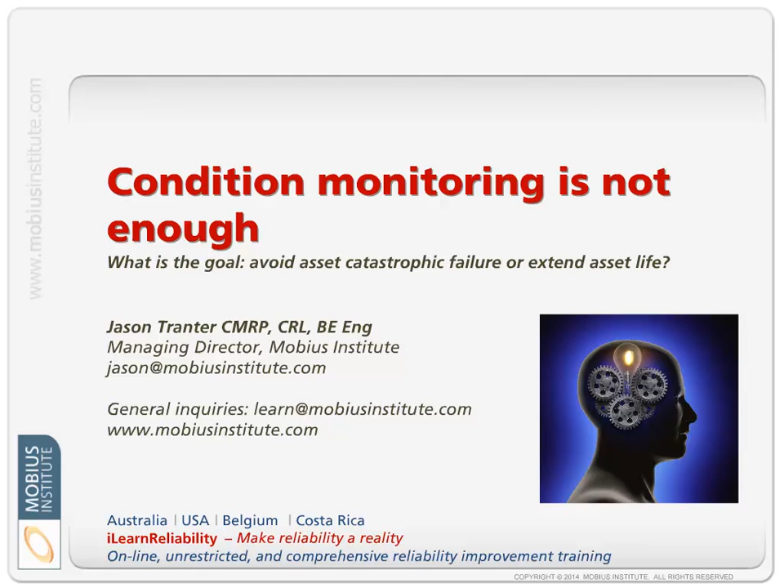In this presentation we're going to talk a little bit about maintenance strategies, reactive maintenance, preventive and predictive maintenance, as well as run to failure, condition-based and interval-based maintenance. Then we're going to talk much more about condition monitoring itself and the benefits of improving reliability, but also about the program and how some programs don't actually take full advantage of condition monitoring. The main emphasis is to talk about how condition monitoring relates to reliability improvement and what we can do with condition monitoring skills to go on and improve reliability.

And then we'll go further, because we'll talk about defect elimination, the design and procurement process and how that affects reliability, the maintenance process, inventory management, maintenance and repair and installation, and also when the machine is being operated, machine and electrical equipment, what can we do to improve reliability through all those stages? So we'll talk about all those aspects, but with an emphasis also on condition monitoring and how those skills can be used to not only monitor the condition, but also improve the condition.

And then we'll get into a little bit about why so many reliability improvement programs fail. We'll talk a bit about what we think you should do in order to make that program a success, but also a little bit about why it fails. And then we'll wrap it up.

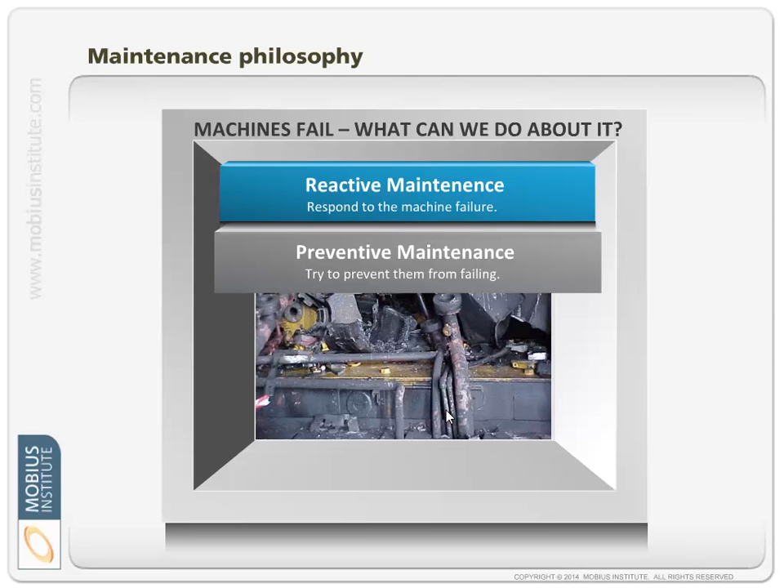Or we can use predictive maintenance, where we'll take certain measurements or perform inspections and try to predict when equipment will fail. If it's in good condition, we leave it alone. But we'll talk much more about these in just a moment. We'll look at precision maintenance much more later in the presentation, but that's certainly a strategy that people look at, doing things like alignment and balancing and just better ways of making installations so that the machine lasts longer. And then defect elimination. Again, we'll talk about that much more later on.

Just on reactive maintenance, really reactive maintenance is no maintenance. We're not maintaining the running status of the equipment. We are just reacting and having to repair or replace equipment when it fails. As I mentioned earlier, a lot of people doing a lot of very good work, working hard to keep equipment running or get equipment back up and running, but there's a lot of safety incidents that follow, a lot of energy wastage.

But really a lot of downtime, a lot of parts failing when they shouldn't. It really costs the company a lot of money, and that loss of money can impact the ability of the company to continue to operate. Shareholders get upset, government departments get upset. Really, it's not the best way.

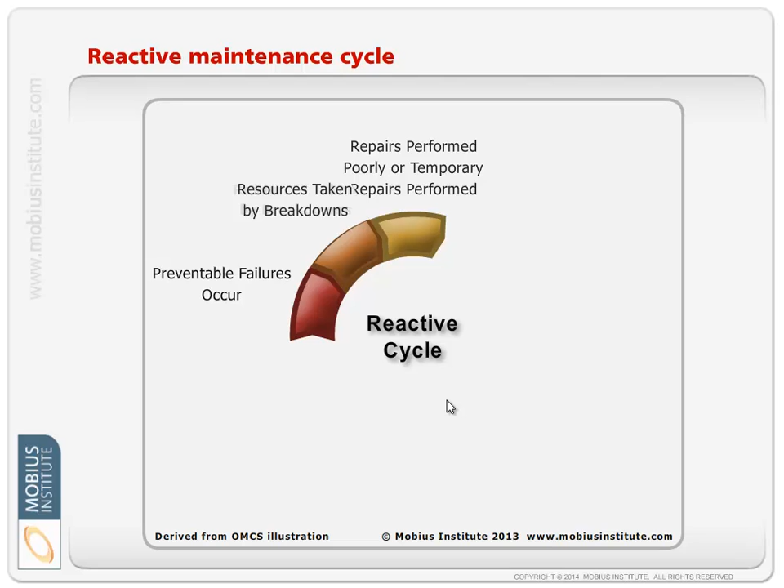When we look at this sort of reactive cycle, we have a problem, resources are taken by those breakdowns. Because everything's so urgent, there's often repairs performed temporarily, just quickly. We've got to get the machine up and running again, so we install the replacement motor, let's say, but we don't necessarily have the time to do it properly.

We don't have time to do root cause failure analysis to eliminate those root causes, but we do get lots of repeat work because we quickly install the machine and it fails soon. We think there's not enough time to do it properly, yet there seems to be time to do it again and again and again. Operators or particularly maintenance people might suggest, wow, if we just made these changes, maybe these failures wouldn't occur. But often everything's so urgent, no one really listens to those suggestions, nothing's improved.

But management start to think, wow, financially this is unacceptable, and they look at ways to cut the budget, to save costs, to reduce costs. And the short-term thing to do is to fire people or change the maintenance practices and make them even worse. Sure, they get some short-term gain, but it's not a long-term strategy.

The situation just gets worse and worse. Morale declines, standards drop further, backlog grows further. Any preventive maintenance tasks that are put in place, if there are any, they're missed because there's always more urgent work. And we continue around the cycle. Preventable failures occur, and so on, and so on, and so on. This is a cycle we need to break out of, and it can seem like it is very difficult to break out of that cycle.

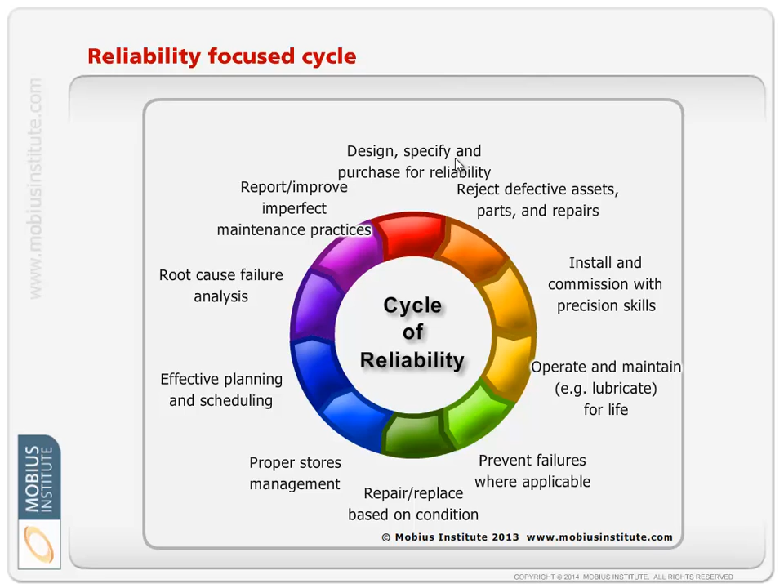If we keep doing that and keep focusing on these things, then we will have a much more profitable plant. Morale will be higher, the shareholders will be happy, the regulatory bodies will be happy, and so on.

The trouble is, if you're trapped in that reactive cycle now, you'll feel like we don't have the time to use those precision techniques, we've got to get the plant running. But as I mentioned before, how come you have time to repeat the job again and again? You install the bearing, you may have to reinstall a replacement bearing very shortly afterwards, or another sort of fault develops. We seem to always make time to deal with those problems. We just don't seem to be able to make time to do it properly in the first place, and that's one of the things that can change.

It's not rocket science, as you'll see. It's really common sense, quite straightforward. You just need to do it, make it a priority.

The other thing is, you might say, well, they're trying to save money. Upper management are trying to save money, and I'm sitting here saying that there may be special tools you need to use to do the job properly. You need training to do it properly, and you may need some systems in place to do it properly. But so often, yes, at times there will be investment that's required, but you'll be surprised at how much you can do without much of an investment, if not no investment at all. It's just a different philosophy, organising the maintenance crew a little differently, making sure operations operate the equipment the way it was designed to operate. There's a lot you can do without much of an investment, if any at all.

So just briefly, it's worth considering, why do we need to improve? What is the business case for all of this? Now, like a lot of things I'm going to talk about in this presentation, there is a lot we could say on this topic - lots of research, lots of case studies. Because it's not the main focus, I'll get to the point a bit more quickly.

As I say, I'm not going to talk too long about all these things. There are other topics we need to get onto, but we are also going to increase availability by achieving the design reliability. Now, there's a certain reliability inherent in any piece of equipment, but we should be looking at what we can do to at least achieve the reliability of the equipment that we receive, but better yet, improve the reliability through cleaning and proper operation, and there's lots of ways to do it. We can improve the reliability and then go further, as we'll discuss later, to get even better results, because what we're bringing into the plant is in better condition and better designed for the application.

And we can increase capacity, so we can look at efficiency improvements by eliminating idling and minor stoppage losses, and improving quality. So we've got a certain availability, a certain amount of time that we're producing a product, but what we want to do is produce saleable products in that time that we're producing.

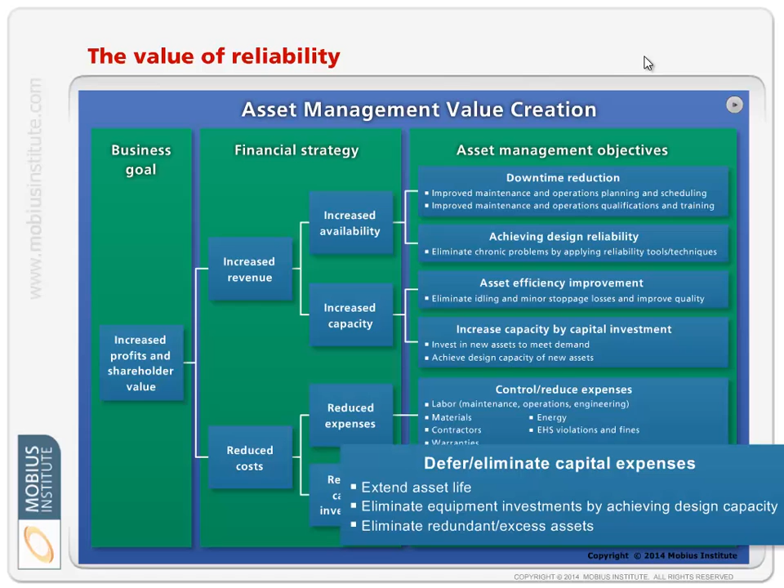So these are really important areas. Jeff Dudley, who developed some of our training product, was the Corporate Reliability and Maintenance Director at Dow Chemical, and he puts it very simply: organizations with poor reliability practices waste 10% of their revenue, waste 15% of their resources, they disappoint customers, they disengage employees, and they constantly deal with new and repeated unplanned events. A lot of what we're talking about flows back into this - why this happens and what we can do about it. He was involved with so many Dow Chemical plants, and that was his conclusion, looking at so many plants, from inside and outside as well.

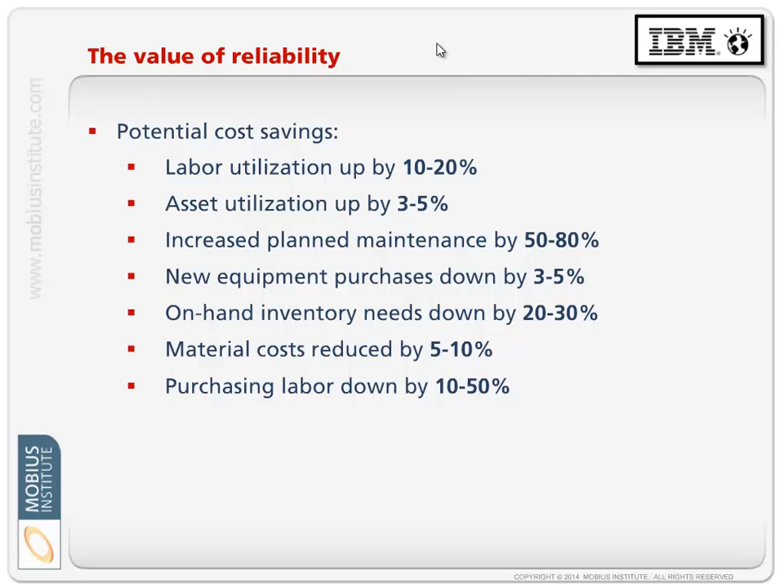Looking at the potential cost savings by going through this sort of process: labor utilization can be up 10 to 20%, asset utilization up 3 to 5%, increased planned maintenance by 50 to 80%, new equipment purchases down, on-hand inventory needs down, material costs reduced, and purchasing labour, contract labour down by 10 to 50%. Again, these are all really impressive numbers - numbers you should aspire to achieve. So we will see how we can achieve those.

Safety and reliability. Everyone, particularly at senior management level, but everyone is interested in reducing the number of safety incidents. The fact is that when a machine fails or when there's an electrical fault, there is a chance of a safety and environmental incident right there because of the failure. It can lead to a safety incident. But the other thing is that any time someone is spending time working on a machine, if you're involved with electrical or mechanical equipment, there is a higher likelihood of a safety incident. It is more dangerous around the machine.

Particularly if you're in a reactive maintenance mode, work is being rushed, potentially unskilled workers are doing that job. You may identify someone who should do the job, but they're working on another project and now they're not available for the job they should be doing perhaps. There's not adequate planning, they're using the wrong tools, etc. The bottom line is there is a direct correlation between safety and reliability. The higher the reliability, the lower the number of safety incidents. In other words, high reliability, high levels of safety.

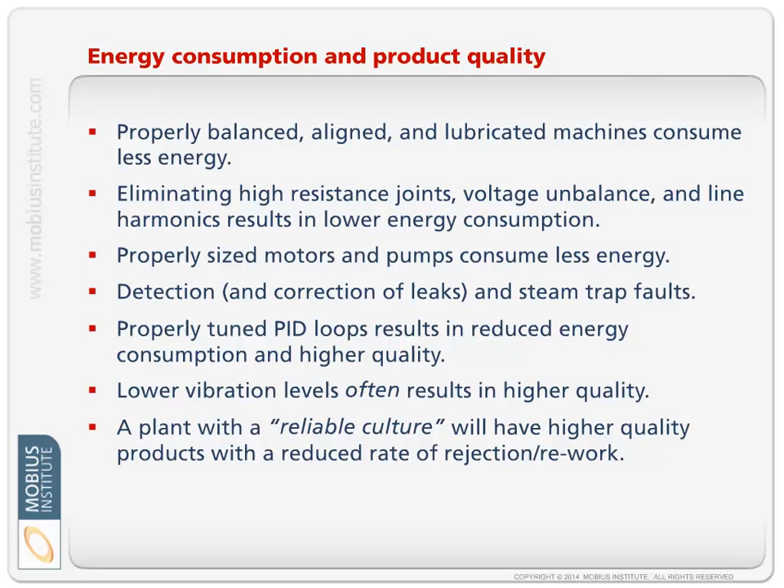Now again, that depends on what it is you're producing, but certainly a plant with a reliable culture will have higher quality products with reduced rate of rejection and rework. So savings in energy, improvements in product quality. Again, it's going to depend on your particular industry.

So let's revisit the question of maintenance practices. We're going to describe them a little bit differently. Instead of just talking about reactive maintenance, which is just the way all maintenance is being done, we're going to choose to have some equipment that we allow to run to failure, and I'll mention more about that in a moment. We are going to identify some equipment where we are going to perform interval-based maintenance.

It's going to make sense because they are age-related faults to schedule the maintenance, some replacement task on a time basis or a number of running hours or kilometres travelled or whatever it happens to be. But for a lot of our equipment, which generally speaking may be 80% of equipment, but that's going to depend on your industry, we will implement condition-based maintenance.

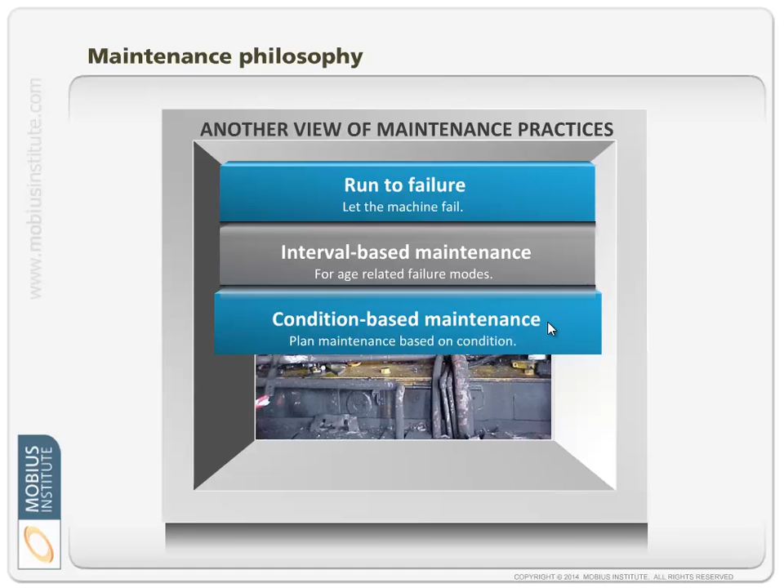So some we allow to fail, some we provide maintenance on an interval basis, but the rest we have condition-based maintenance. And we will identify some equipment that doesn't conveniently fall into any of those categories, and we will look at a redesign. And then, as a general statement, we'll have proactive maintenance. But it's much more than proactive maintenance. I'll be talking more about it, defect elimination.

So before we can really talk about that too much, we need to understand a little bit more about failure modes and failure rates. So if we look at a family of equipment, motors and pumps and so on, how does that equipment fail and why does it fail? In many cases, when someone's trying to break out of reactive maintenance, their thought is, well, I need to get ahead of the curve. If we can plan the maintenance before it fails, then that's ideal.

And that is ideal, to plan the maintenance before the equipment fails. Where that goes wrong is there is an assumption that you can accurately predict, just simply based on running hours, let's say, when the equipment's going to fail. And unfortunately, that's not necessarily true for the majority of your equipment. And I won't dwell on this topic because we do have other presentations on this.

But the general feeling is, if we look at the y-axis here being risk of failure, there's always some risk of failure, but after it's been overhauled or repaired or replaced, that risk will be low. We'll go through some period of time, and then finally, if we look at just an individual piece of equipment, something happens such that the bearing's damaged and or wear begins, and the risk of failure increases and increases until finally it does fail.

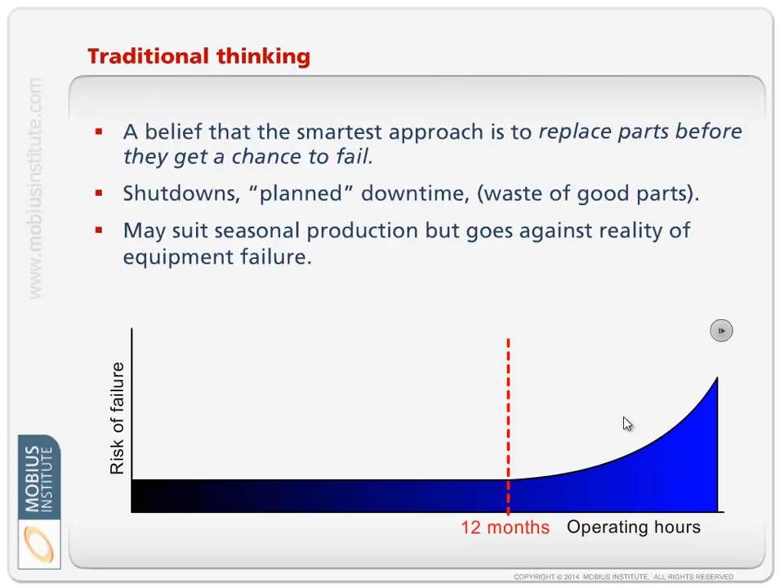And we can look at a whole family of motors driving pumps and say, yes, that is what we expect. And based on that, we might say, well, if we replace all the bearings and seals or whatever you decide is appropriate at 12 months, then we have this trouble-free operation. We perform that maintenance task, and then we reset the clock, and we just keep in this mode. And that would be lovely if it were true, and lovely if the equipment was going to fail soon after, and that's what we've avoided. But that, unfortunately, is not the case.

First, we have to consider that there's infant mortality. Generally speaking, depending on your maintenance practices, the worst thing you can do is touch the equipment. Once you open it up and go to replace a bearing, even if that equipment was in perfect condition beforehand, there's a chance, unfortunately quite a good chance, particularly in a reactive environment, of introducing some sort of problem.

The bearing's not installed properly for one of a variety of reasons. Lots of things can go wrong. So in actual fact, when we go to start that machine, there is a much higher risk of failure. And it can take some time before we can really say, all right, the risk of failure has reduced, we've survived that infant mortality period.

And now we're just operating the machine through this period of relatively low risk of failure before it naturally begins to fail, because we're assuming they're age-related faults. But because there are so many reasons why equipment fails, again, if we just look at our motor pump, there are so many reasons why the bearing might fail that we really don't know when the failure is going to occur. We call that random failures.

It could occur after 6 weeks, 6 months, 6 years. It could be anything, because we don't really know how bad the alignment job was, how badly the bearing was installed, how much misalignment, how much unbalance, how bad the lubricant is. We don't know. So looking at any one piece of equipment, it could wear out after this much time. This is just one piece of equipment. It could wear out after that time. When I say wear out, fail. That much time, we just don't really know.

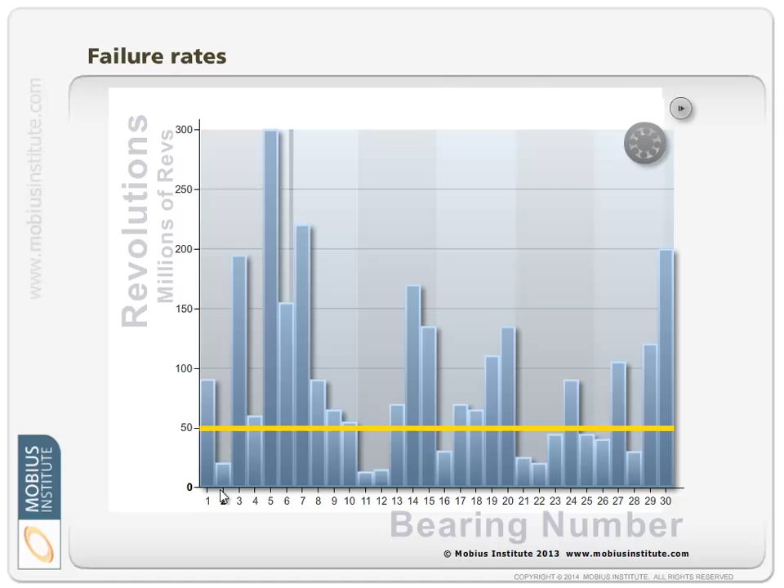Now you can see that some bearings failed rather quickly. Some lasted a very long time. Now it's not to say that your results are going to be as dramatic as these, but the bottom line is that it isn't a consistent, predictable age that you're going to achieve. So you certainly don't want to be maintaining or replacing these bearings to avoid any failures, because these bearings lasted a lot longer and you're wasting money.

I almost said the word react, because condition monitoring is a little bit like an advanced form of reactive maintenance. We're determining that there's a problem and reacting to it. But at least we don't allow the failure. We can plan the maintenance for the most convenient time with the lowest costs. But if we can improve the maintenance practices through the techniques that I will talk about, we can increase the life of these bearings as well.

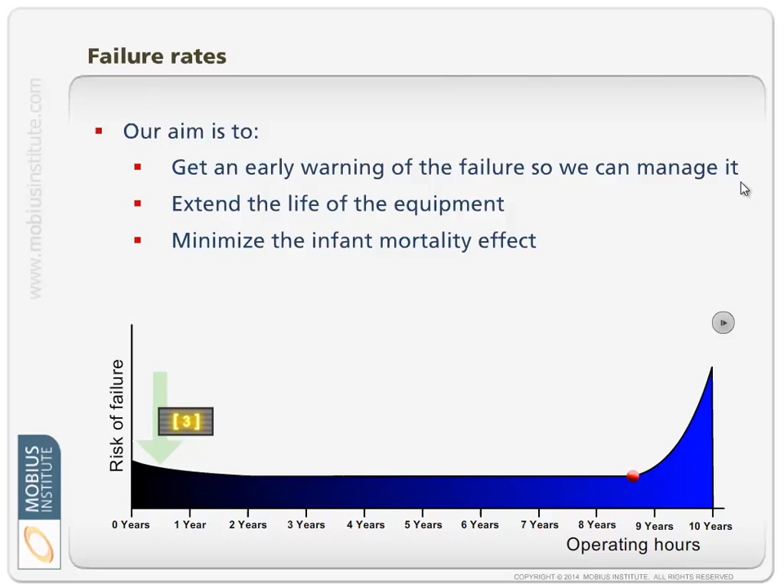What we also want to do is extend the life of the equipment. Yep, detect the problem earlier, but make the detection of the problem 9 years, not 9 months or 9 weeks. And finally, we're going to change our maintenance practices to greatly reduce that risk of infant mortality. So that's something else we want to do. And again, all these defect elimination techniques that I'll talk about achieve that goal as well.

So I mentioned that run to failure is still acceptable, but only under certain situations. The equipment is not expensive to replace. It doesn't pose a safety risk. They're not critical, and of course we'll perform an asset criticality ranking in order to determine what's critical. That failure doesn't cause secondary damage, and you carry spares, or you can get them easily enough such that when there's a failure, it doesn't really matter.

And therefore you can't justify either performing condition monitoring or preventing failure by replacing parts on some sort of interval. And it probably isn't justified to perform root cause failure analysis unless you find it easy to do and you know why it's happening and you can make some sort of an improvement. But ultimately, equipment like that you can run to failure, and that's a sensible thing to do because you'd be wasting money to do anything else.

You still might make sure that you install it properly, and if it requires lubrication, do that properly. Consider what spares are required and how important it is to have these sorts of spares. And if you hear that the fan's making some awful sound, you might still repair it before it catastrophically fails, or replace it. That's up to you.

But then we can look at interval-based maintenance. Now, here is the situation where we are confident that if we perform a maintenance activity based on the operating hours or the kilometres the trucks have gone, or just based on calendar, that is the most appropriate strategy. And I'm sort of talking about it in this order, in other words, not talking about condition-based maintenance now, because I'm going to talk much more about condition-based maintenance. But the bottom line is we should really try and do condition-based maintenance, and if that's not possible, use this technique.

So basically, if they are age-related and we cannot detect them with some sort of condition monitoring technique, then we should try and prevent them. If we know that it takes a certain time for this particular cog to fail, then we'll just schedule its replacement in time. But when we talk about preventive maintenance, I've sort of deliberately not used that term because it can be used in very different ways. So that's why I'm talking about interval-based maintenance.

The act of performing either a classical condition monitoring task like vibration analysis on some time schedule, or performing an inspection, I'm going to lump all of those tasks together as condition monitoring or condition-based maintenance. So going out there and looking at the cogs and looking at the teeth, I consider that condition monitoring. It's you performing an inspection, and your maintenance decision to repair it, to replace it, whatever's applicable, is based on its condition, not based on a time interval.

So you have to think really what tasks, what assets do you have that really do fail based on a time interval. In this case, talk about tyre wear. We can say that that's an age-related fault, but different drivers might achieve different rates of wear. Better drivers might have the tyres wear less, depending on road conditions, weather conditions, all sorts of things. And therefore, again, we can inspect the tyres. We may plan to, have in the budget to replace those tyres on a certain interval, but ultimately we can perform an inspection, and if the tyre's still good, we don't replace it.

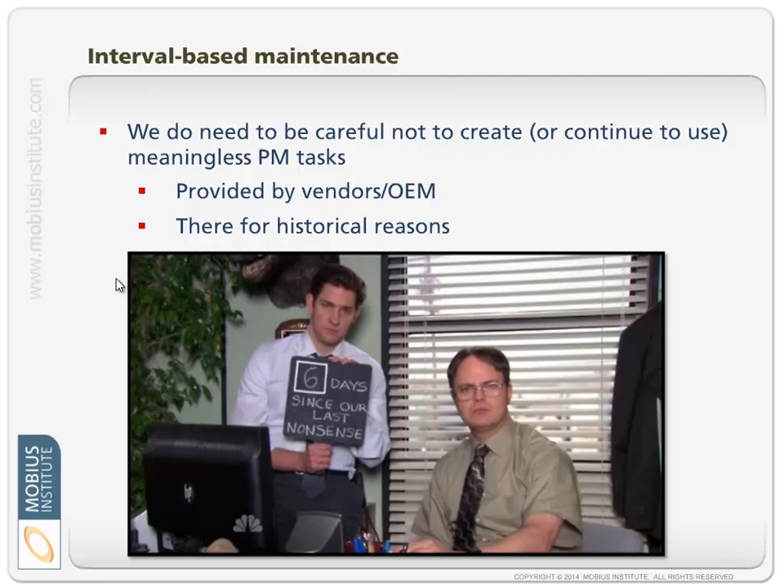And of course, tasks should be more useful than just saying 'check pump.' What is a person checking? Just for a laugh, the pump's missing. Oh, they actually did detect something this time. But you've got to make sure that PM tasks, planned maintenance tasks, are actually useful and adding value, and have a way of reporting back that some sort of work is required.

Because any time we perform an intrusive task, we have the likelihood of damaging the equipment. Having a joke, you drop a flashlight or a torch inside and it damages the teeth, but it's true. You open a machine, you increase the likelihood that you're going to damage it and therefore reduce its reliability.

So let's look at condition-based maintenance. We know from a lot of experience that equipment warns you before problems occur. The ultrasound tells you there's a leak. Ultrasound and infrared tells you there's arcing. Ultrasound might tell us that there's a need for grease.

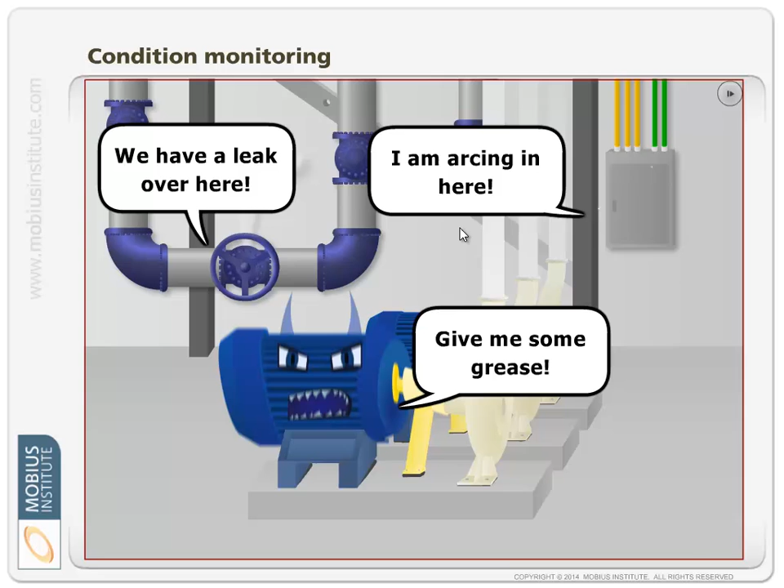Vibration might tell you. There's lots of different condition monitoring technologies that tell us what the condition is, and we can act on that. So we have the more classical techniques: vibration analysis, ultrasound, thermography, oil analysis and wear particle analysis, motor testing, dissolved gas analysis on transformers, partial discharge, and lots of other classical techniques that may require some special instrumentation and some expertise.

But we can also perform inspections and make observations. Operators can be asked to not only keep an eye out for problems, but specifically go and look for oil leaks and bearings that feel hot, and so on.

And then we can also use performance monitoring to look at the performance characteristics of a compressor or a pump, looking at flows and pressure, and see, okay, it seems to be okay from a vibration point of view, but in actual fact it's not performing the task correctly, it's not efficient, and it may have functionally failed. It was there to achieve a certain pressure and flow, and it's not doing that.

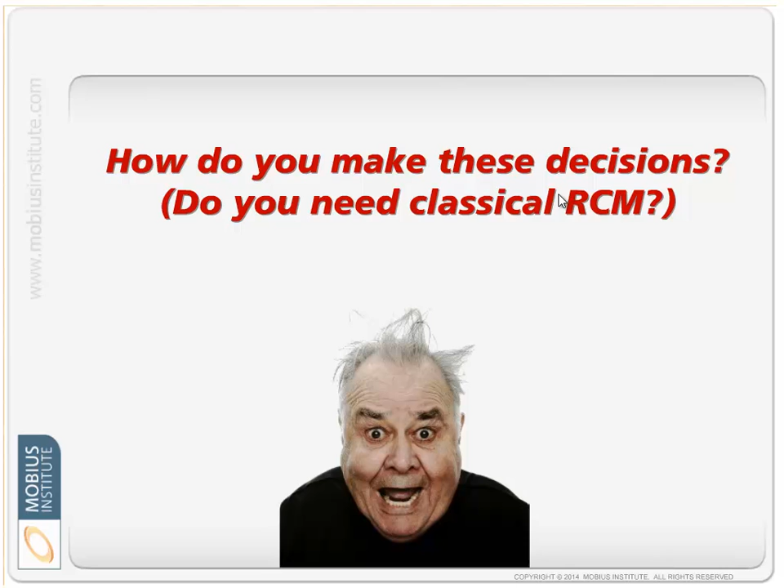We could talk about classical RCM for a long time. I've used this guy with that expression simply because, on the one hand, a lot of people have tried and failed, and I'll mention that a bit later, but also a lot of management are a little bit wary of RCM. Now, I don't want to say it's a controversial topic, but some people have very strong views one way or the other. The truth is that taking a classical RCM approach can suck up a lot of time and resources, and sometimes there is no result as a result. There is a more streamlined way to come to these conclusions without going through this really detailed process.

There's a lot more we could say about that, but that's enough for now. What I'm just going to briefly mention is that ultimately we're trying to develop this reliability strategy. Which ones can we allow to fail, and then we'll have run to failure? Which ones can we predict, and we'll use condition-based maintenance? Which ones can we prevent through some age-related interval task, and we'll use interval-based maintenance? And if we can't prevent it, we can't predict it, but we don't want to let it fail, then we need to consider a redesign.

But how do we make those decisions? Well, at the very least, you need a master asset list. You need to perform an asset criticality ranking so that you can prioritize all these sorts of decisions. You then need to think about the failure modes, the risks, the detectability. You can go through a practical process of making these decisions.

In the interests of time, I won't elaborate too much on it, but rather than just saying I'm going to buy a vibration analyzer and start measuring things, you'll get a return on investment. It might be a satisfactory return on investment, but you will achieve much better results if you go through this process.

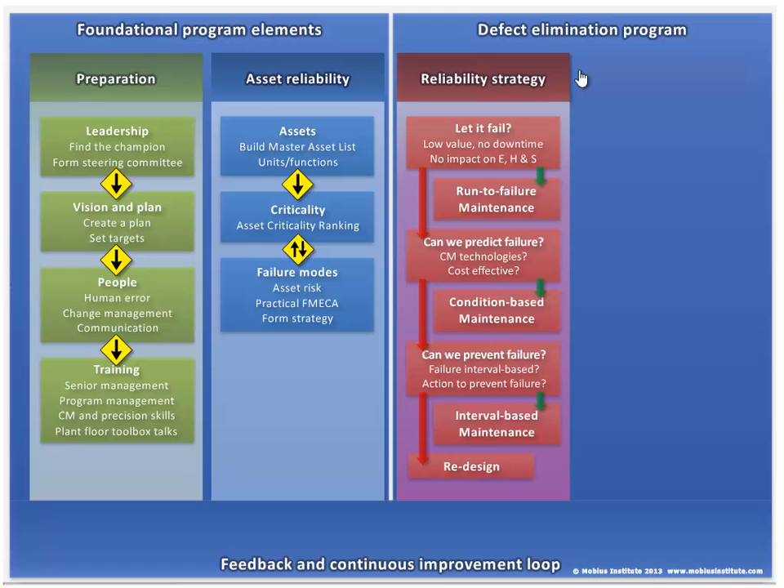There's a lot more to this. I won't go into all the details right now, but certainly having leadership and having this driven from the top is a good idea. Having a plan and a vision to make all this happen, considering all the culture change issues and so on, is an important thing, and training. As I say, I'm not going to dwell on this. The ultimate goal is to get to this point where we can have proper procurement, stores, inventory management, planning and scheduling, precision skills, operator care, and root cause failure analysis. And then we want to look at a proper continuous improvement program.

Okay, just to dwell a little bit on asset criticality ranking. A lot of organizations really struggle with this because there's this argument about which is most critical, on a very simple measure: how would I feel if it failed? Well, we don't want it to fail because it can stop production, and there might be thoughts about the safety implications or the cost of repair or replacement.

Just looking at the importance of a piece of equipment makes it very hard to decide which one's more important than another, because there's a lot of equipment that we can easily say is very important because it can stop the plant. We need to go further. We need to break that decision up into its component parts. We need to get agreement.

What we need to understand is that criticality is not just importance. It's not just about the consequences, it's about the likelihood of failure as well. So if we can assess that two pieces of equipment are equally important to us, the consequences are the same, but one has much better reliability than another—in other words, the likelihood of failure is much lower with one than the other—then the one that is more likely to fail becomes more critical.

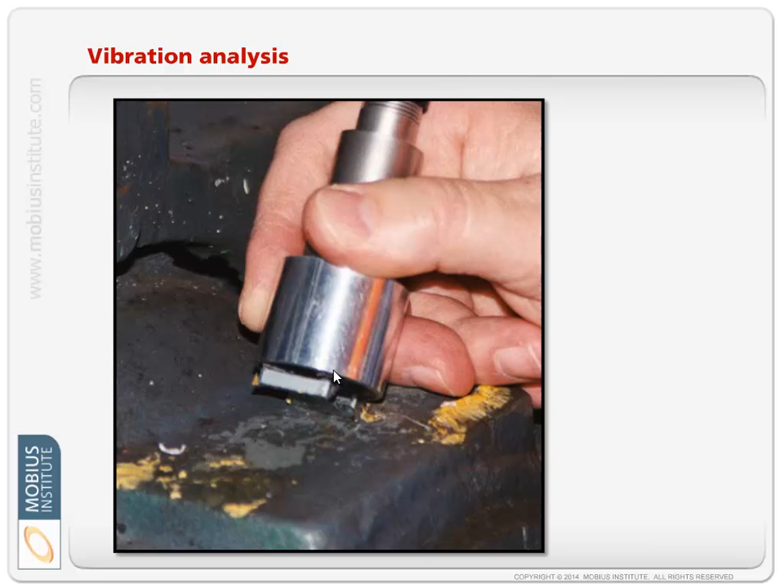This one, a person's taking vibration readings, but the thing's covered in some sort of dust—maybe it's a cement mill or something else. Now, yep, you've got to take the measurements, but why not be proactive and say, well, having a machine covered like that will reduce its reliability, so let's keep it clean. Don't just monitor and wait for the bearings to finally fail or something else.

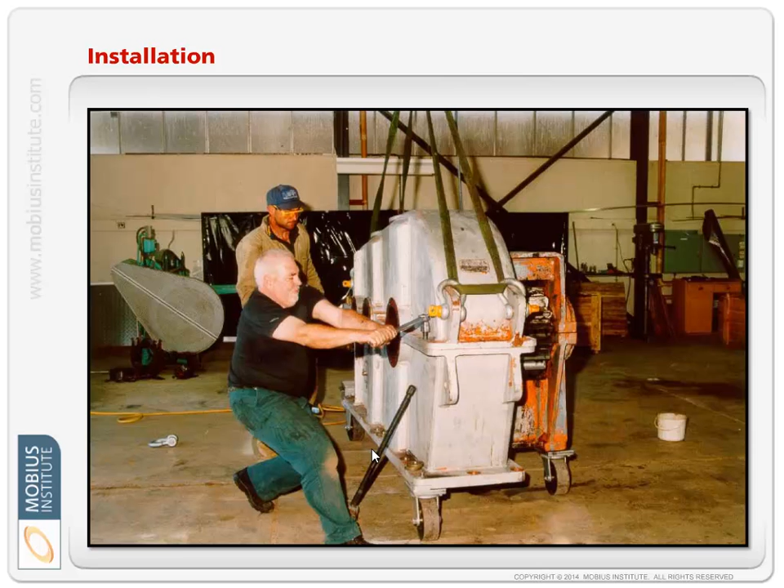Bearing installation—just for fun, there he is with a hammer, giving a good old bang. It's not the best way to do the job. It's just not the best way to do the job. An appreciation often doesn't exist about the need for the right tool and how to use those tools.

And then even if you're doing condition monitoring properly, the question is: is anyone listening? Are the maintenance planners actually listening to you when you say there's a problem? Do they believe in the technology? Is the philosophy that we will plan properly when the condition warrants it, and not based on calendar?

Just as a little detail, there are a lot of ISO standards out there that talk all about how people involved with condition monitoring should be trained, what experience they should have, and the whole certification process. Again, I am biased—we offer certification and we're accredited to these standards and so on—but they are there for a reason.

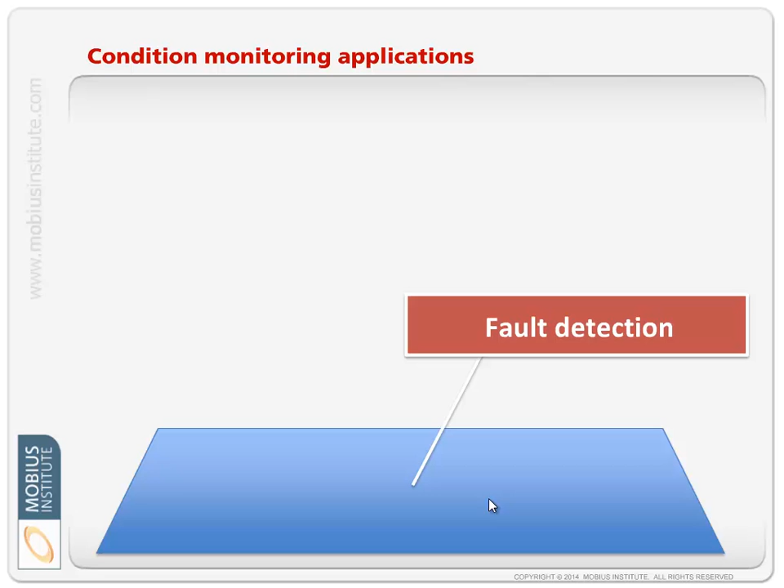I like to describe condition monitoring as a number of layers, and I would argue that most people really just deal with it at this primary layer. It's just fault detection. We are looking for problems, we find the problems, we deal with the problems.

If we have a proper condition-based maintenance program, then we can go a step further and say, well, we're not just reacting to problems, we really are properly performing our maintenance based on conditions. That's a good thing, and this is where we start bordering on reliability improvement.

But it's also using condition monitoring for quality control. So when a piece of equipment is repaired, we can test that piece of equipment. I'll talk much more about how condition monitoring can be used for quality control as I go further.

As I mentioned earlier, we can get an early warning, we can reduce the maintenance costs, we can enhance the planning process. It is valuable just looking at it from a QA point of view and a maintenance planning point of view.

...to try and gather a lot of data to understand the true reliability of their plant, considering redundancy, equipment in series, equipment in parallel, and all that sort of thing, to try and understand what their likelihood is of being able to achieve a certain level of utilization.

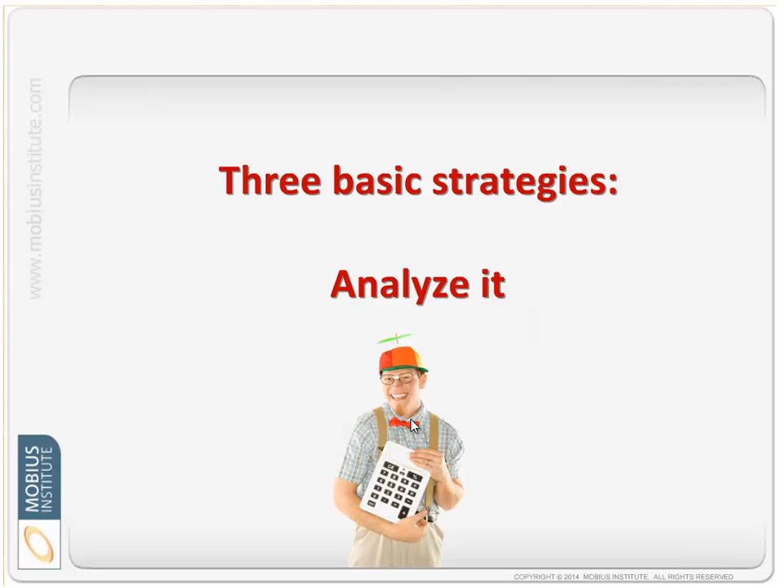We can also look at it from a maintenance point of view. Something breaks, we fix it. We perform some tasks like lubrication and so on to maintain its operation. And I would argue that to a large extent, reliability-centered maintenance focuses on this. It suggests that maintenance is responsible for the reliability problems - that if we improved our maintenance, we would achieve better reliability, and if we've got better maintenance, we're better able to deal with poor reliability.

Now, it's not to say we don't want better maintenance practices or a maintenance crew able to deal with problems, but I think the focus has got to be on improving reliability. Don't just accept the inherent reliability you've experienced thus far - that doesn't have to be your future. It does not have to be your future. So I'm going to add another layer where we look at condition monitoring and see how we can use it to proactively improve reliability, and one of the best techniques is defect elimination.

Let's explore defect elimination in more detail. Unfortunately, I can't go into every single detail in a lot of depth - this is just supposed to be a couple-hour presentation, but let's have a look at it. We're going to look at how we can improve reliability and utilize our condition monitoring skills to contribute to that improved reliability.

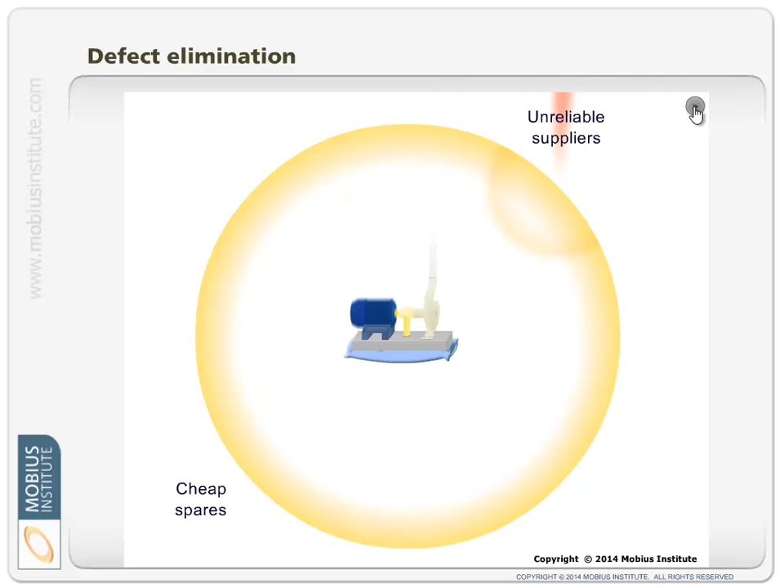Cheap spares don't get into our plant, because we know they're cheap up front, but life cycle costs are terrible. Transportation - you've got something that's in perfectly good condition, hopefully, it's transported to your plant and it's damaged. False brinelling of the bearings, very common.

Unskilled contractors - maybe we're too willing to just accept that during shutdowns we're going to let all these contractors come in, do the work as quickly as they can, get out, and not be held accountable. You've got to stop that if you want to improve reliability. Designs of equipment - who is making a design with life cycle costs in mind, maintainability and reliability?

Once we've done that, we are stopping, and the procurement process is part of that, and I will elaborate on all these things. Now hopefully what gets into our plant is worthy of your plant. You haven't bought anything, you haven't contracted anything that's unreliable. What gets in your plant is good.

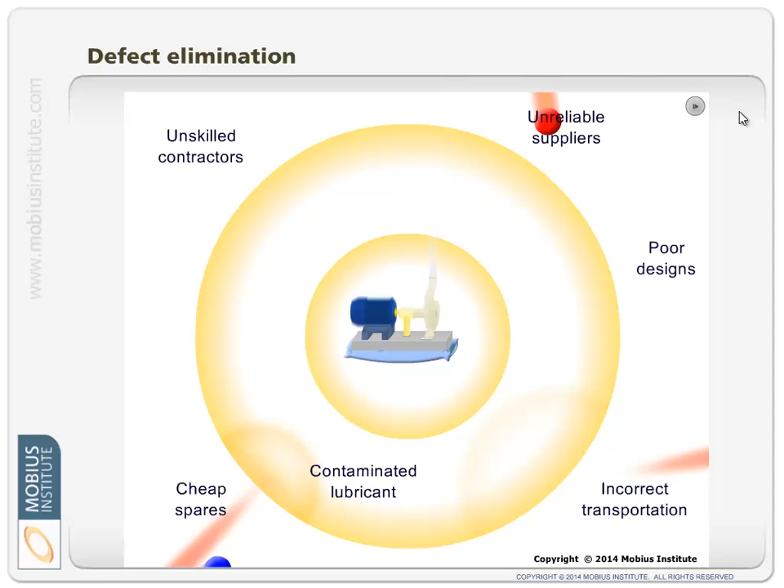Now, how do we protect the machine further? Because what we need to do is we've got to keep contaminated lubricant out of that machine. We can buy good lubricant. We can also buy poor lubricant, but we can buy good lubricant that becomes contaminated, and we don't put that in the machine. We don't damage parts while they're sitting on the shelf and then try to put them in the machine, or we don't damage them in the process of putting them in the machine.

And as part of that, we don't accept poor installation practices. We've got to protect our machine from that. We've got to protect our machine from poor operating practices and unnecessary PMs that just induce problems, and intrusive inspections that induce problems. And finally, we're going to do true maintenance, you might say, by cleaning it, adjusting it, replenishing various lubricants and so on, and we will monitor it.

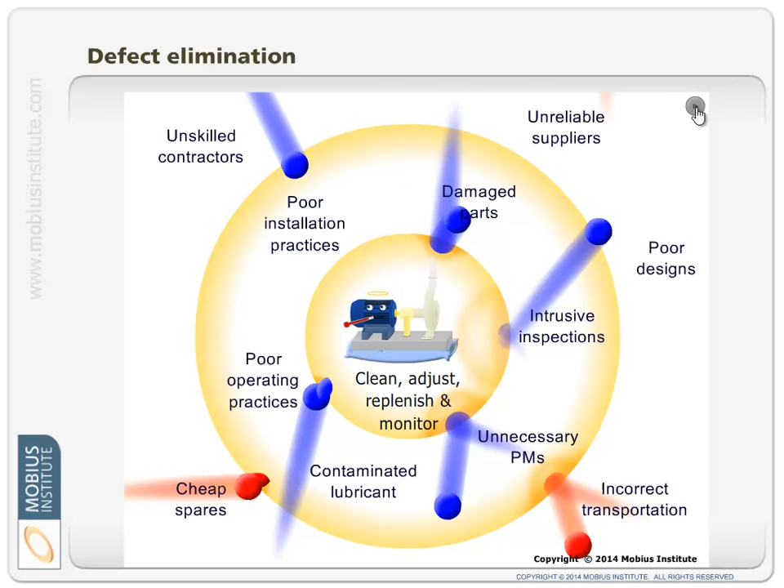We will watch over it and say, we've protected you as much as we can, but wear still happens, and problems still happen. And when that happens, we are going to monitor it, deal with it, use root cause failure analysis to see how it got through and harmed our machine. So that's the basic idea of defect elimination. So let's talk about it a bit more.

I'm going to basically break it up into three areas. When it's operating, when we are installing the equipment or overhauling it and storing the equipment, and the procurement and design process. So we have to look at our procurement process and the design decisions we are making so that the life cycle costs are prioritized over the upfront purchase costs. And we have to put a barrier, as I just showed, around the plant.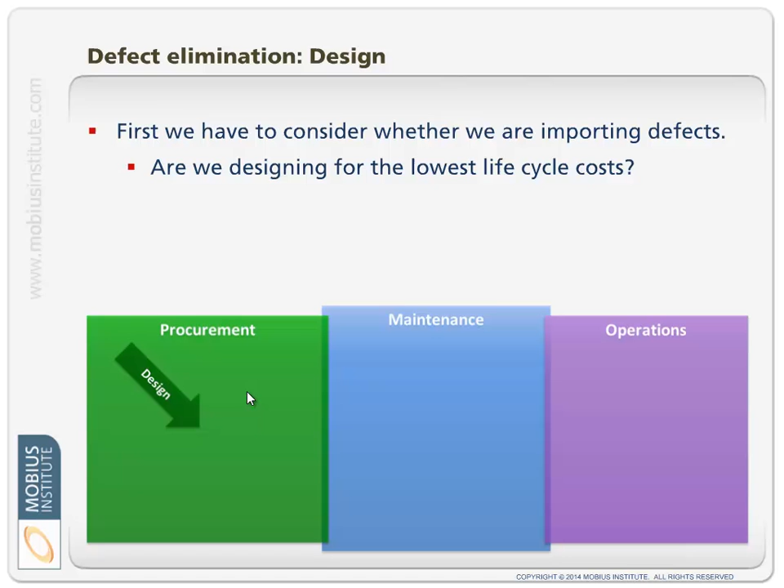So, number one, how are you going through the design process at the moment? Are you designing for reliability and maintainability? Often the answer is no. And then we can look at energy efficiency, but we have to look at how, for example, a motor is rated. So often motors end up being put in place that are rated well above what they need to be. That is not good for the motor. A motor is designed for a particular task, and therefore the correct motor should be specified and purchased and installed. It is very important. As I say, motors are designed a certain way, and that's how they should be operated.

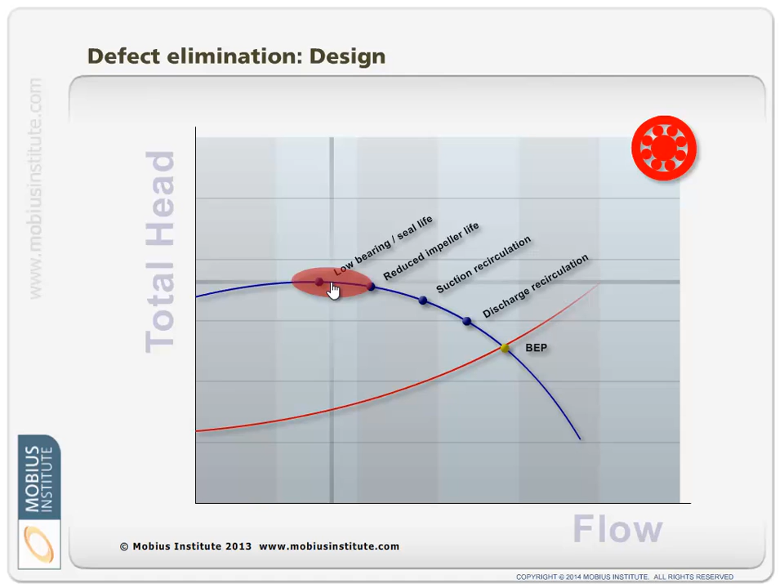Same is true for the pump. We're expecting a certain flow and pressure, and that's how the pump should be specified. We shouldn't over-specify it, and therefore the pump isn't operating at its best efficiency point. All these topics we could talk about in more detail, but we don't have time. If we operate it with lower flow than we should, then we damage bearings and seals, we affect the impeller, we have cavitation and temperature rises.

If we have too high a flow, then again we affect the bearings and seal, and we have high flow cavitation. We need to operate really close to the best efficiency point. Later on I'll mention this again because that depends on how we actually operate it, but at least we need to purchase it so that we can operate it at its best efficiency point.

The purchase process is also so important. Again, I talk about the life cycle costs, but what is the goal of the purchasing department? Usually, it's to buy equipment at the lowest possible price. And that is an important goal. You don't want to spend more money than you need to, but what we have to do is set the bar higher. We need to have the least expensive product that meets a much higher standard. So we have to put those standards in place.

And you have to be very careful about what you're buying. Counterfeit bearings, I'll mention a bit more about that in a moment, but lubricants that don't meet spec, flimsy pumps and fans, and inefficient motors, and equipment with poor reliability and maintainability. If you're not already familiar with it, counterfeit bearings are a real problem. Counterfeit bearings can look better than the real thing. If you just did a normal inspection, they can look better than the real thing, but they are not better than the real thing, not by a long shot.

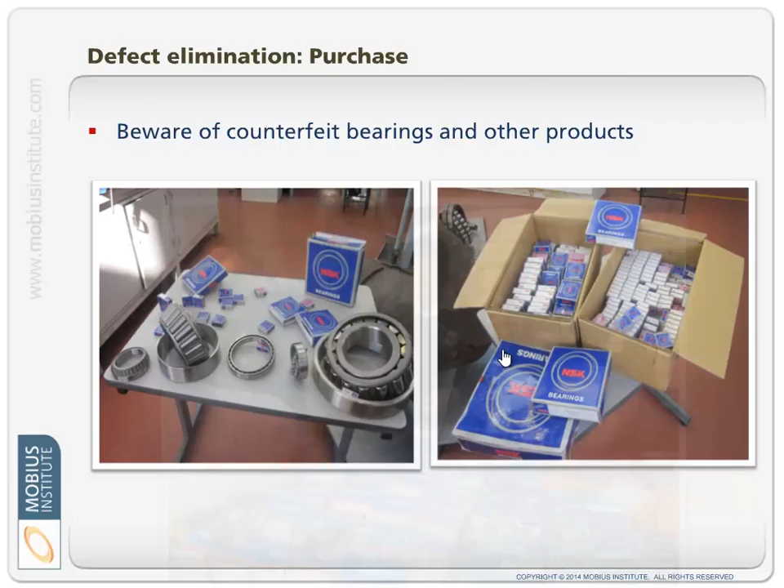And you may have them in your plant right now. When you have failures, you may wonder why you're having those premature failures, but counterfeit bearings could be part of the reason. You need to be aware of just how big a problem this is right now, and not just bearings, oil filters, lots of things.

You just got to think, where is it coming from? How's it been designed, engineered, manufactured, and all that sort of thing, through that procurement process. The equipment, you may think it's fine, but how's it been stored and treated?

All very, very important. This also goes for the people outside your plant who do work for you, like motor rewinds and balancing and so on. What specifications are you putting in place to make sure that they're doing the best possible job for you? Is it the lowest cost bidder? When you send a rotor out to be balanced, what specifications are you putting on that? Are they just balancing it and giving it back, and the vibration's lower, but is it as low as it could be? Are you using ISO standards to set this?

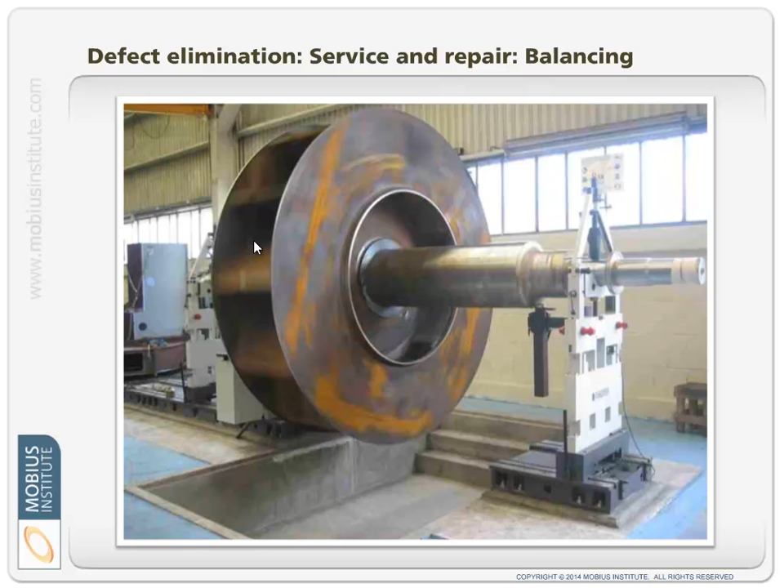And it goes for rewinds and all the rest. You need to know what it is these suppliers are doing, and you need to tell them, well, this is the standard I expect. Otherwise, you will end up with problems, and they will be your problems. Okay, some things might be under warranty, but a lot of times, if it doesn't happen right away, you're left holding the can. So it's very important to put these standards in place.

It's really serious, and the people transporting the equipment need to understand that. And if you don't feel it's been transported properly, then you need to be affirmative about it and just say, well, we're not accepting it. You've damaged it.

Now, this is where the condition monitoring stuff comes into it. It's okay to say we are going to set a high design and procurement standard. We're going to hold our service people to a higher standard and all that sort of thing. But unless you're checking it, unless you're asking them to prove it to your satisfaction, well, they may not provide you what you think. And hey, you might even order things and not have delivered what you expected. That sort of thing can go on.

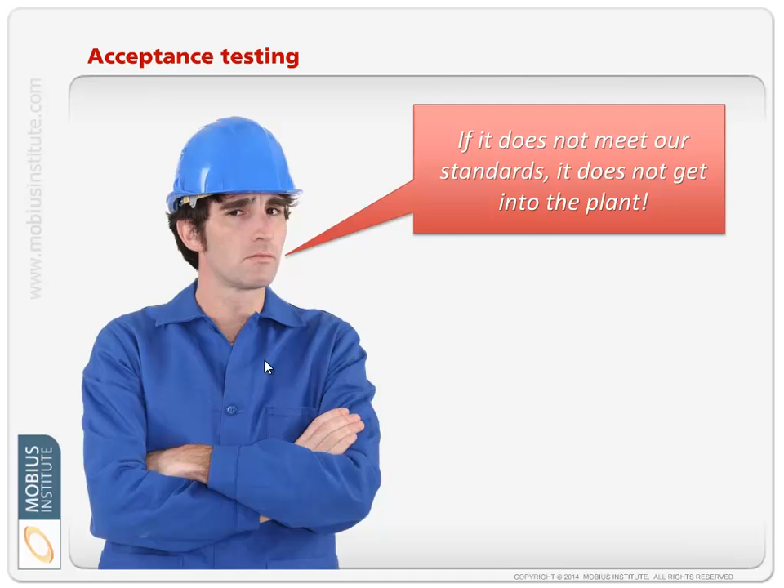So this is where the quality assurance and quality control comes into it. You need to use acceptance testing. You need to stand there and say, if it doesn't meet our requirements, if it doesn't meet our standards, then it does not get into the plant. And this is an area that some organizations get. Some organizations wouldn't dream of accepting motors, pumps, fans, lubricants and so on without it going through acceptance testing. But I find there's a lot of companies that aren't even familiar with acceptance testing.

The sad truth is that a lot of equipment that's purchased is already damaged when it comes into your plant. It already has damaged bearings or contamination or all manner of things. It resonates when it operates. If you buy a skid, it resonates. If a motor and pump are on a skid, they may not be aligned properly. Again, with all these topics, we could talk an awful lot. You can't just assume that it will be of a high quality. You have to mandate that it will be, and you need to provide specifications to that company to make sure that they meet those standards.

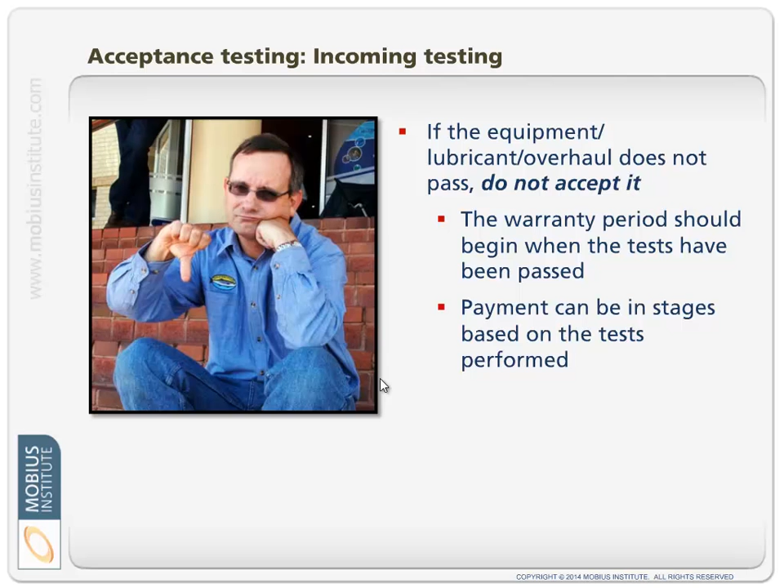So bottom line is, there's a lot that could be said about this, but you need to have acceptance testing. The warranty period should begin when the tests have been passed. You need to look at where the tests are done and so on. But basically, there should be an inspection process and a testing process.

Some of those tests can be performed at the supplier's workshop. Some tests may be performed at your site. You need to specify measurement location, types of measurements, sensors to be used, etc. Don't just say, please test it. You need to be very specific about how those tests are done.

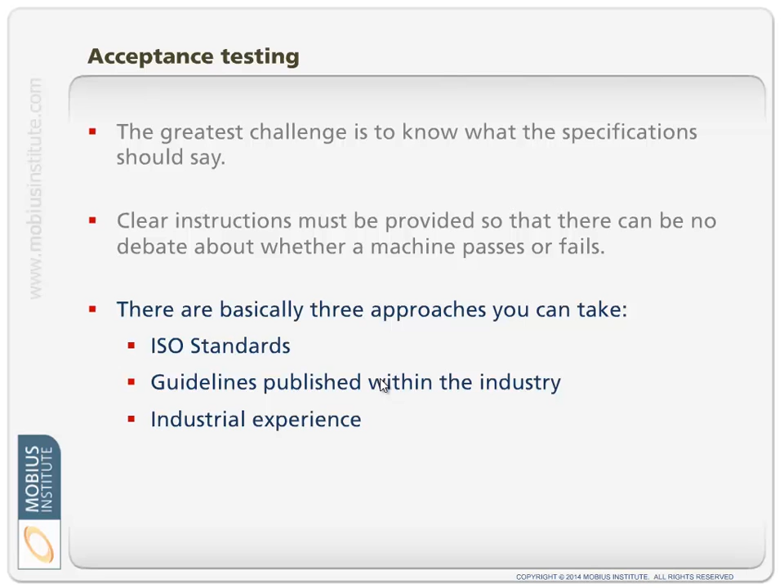Sometimes the feedback I get is, well, it's hard to know what those standards should say. But you need to be very clear, and there are 3 sources of this sort of information. ISO standards, there are some guidelines published just generally out there in industry, and then people have experience. Condition monitoring people know what the condition should be at the beginning.

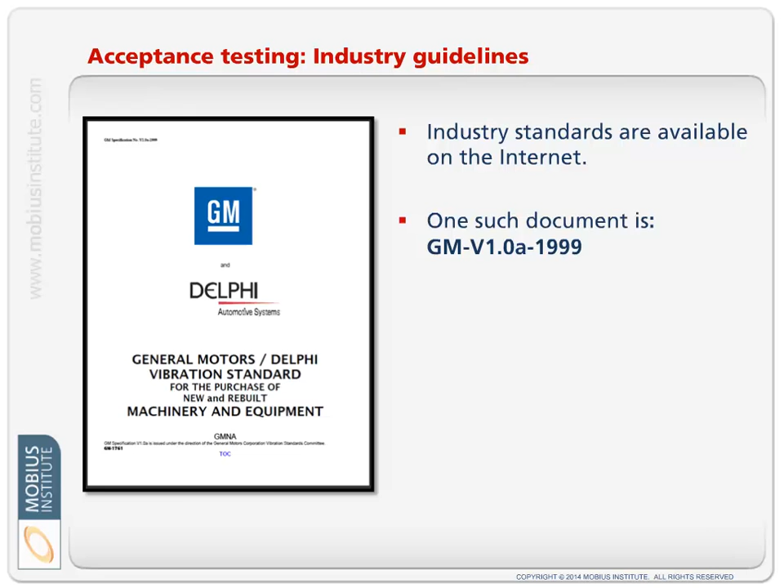Go for G 1.0. But if you Google this, you'll find that this standard's publicly available out there, and it goes through and talks about measurement locations and all kinds of things, vibration amplitudes and so on. It's good. There's a NASA standard out there that you can find. Anyway, so look for these things, set up the standards. Don't assume that what you get from the suppliers is in good condition and fit for your purpose.

Now let's look at the next category. Now we've stopped unreliable equipment from getting into the plant. Now we've got to take care of it and make sure we install it properly as well. We're putting a barrier around the asset itself, the machine or the electrical switchboard or whatever. As part of this, we need efficient spares management and improved work practices.

As always, there's lots we could say about this, but number one, we really need to optimize the inventory. Think about what you store, what gets stored on consignment or whatever at another supplier, so that you can minimize it, but through a criticality ranking you know what you need to keep. But you have to make sure you do not introduce defects into that equipment while it's in inventory.

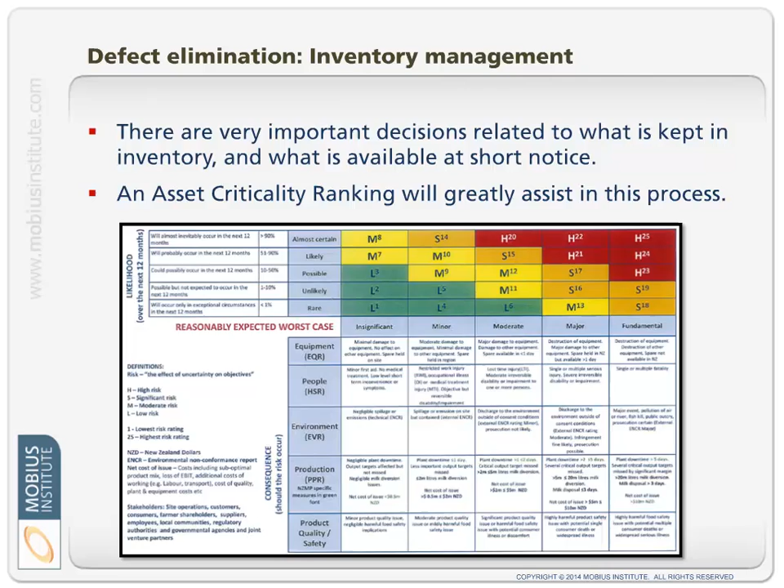And we need to schedule the job so that the right people with the right tools at the right time are doing these jobs. And then when we actually do the installation, it's done in a precision manner using the right tools, etc. that I just mentioned, but that job has to be done properly, not rushed, but done properly.

Now, on this point, we just think about it from the point of view of a bearing for a minute. This is from an SKF study. Now, different studies might use different numbers. Is it really 34% of bearings failing because of fatigue? Maybe, maybe not. That's not really important. We need to eliminate this as a source.

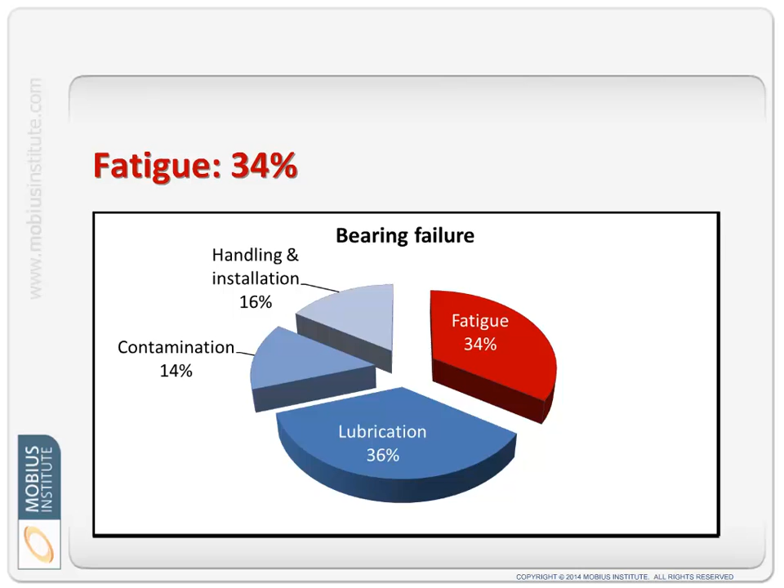The fact is that bearings are very sensitive to load. They're designed for a particular load, and therefore we get the designed lifetime out of it. When we put it under higher levels of load, we get much lower life. So if we double the load on the bearing compared to how it should have been designed or how the bearing was selected, we're down to approximately 12% of its life.

Now let's look at how we do that. Basically anything we do that puts that bearing under greater load as the shaft turns and the balls roll around and so on, these are things we need to avoid.

So ultrasound and particularly vibration analysis can pick it up while it's under the surface. When it breaks through to the surface, we might get metal components that oil analysis will pick up. What we want to do is avoid this situation, not just detect it. We need to align properly.

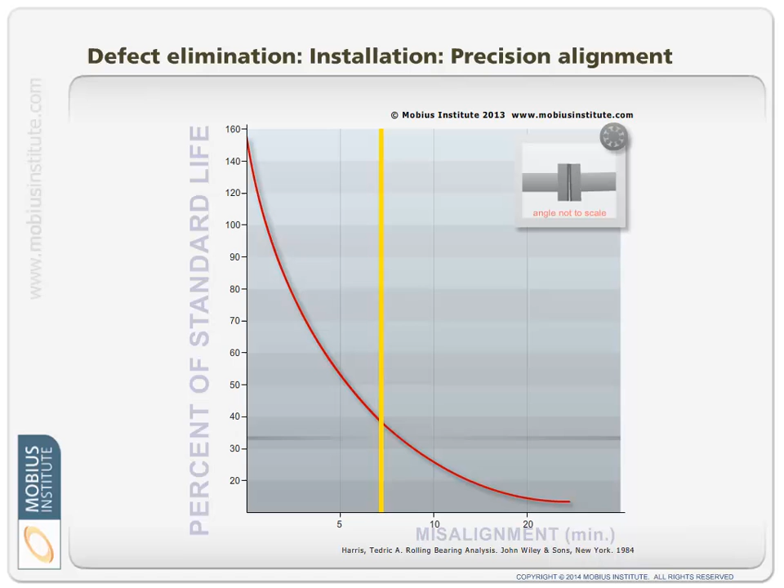There's lots we can say, but again this sort of pattern we have of the amount of misalignment and the reduction in life. Now here you can see this little animation, just trying to illustrate how just a little bit of angular misalignment greatly reduces the life on the bearing. This is from a study you can see referenced down below.

We can use dial indicators if they're used properly. They are good tools when used properly, but laser alignment is obviously a very good tool as well. We need to use belt alignment. We need to make sure we don't have soft foot problems. Precision balancing, I already mentioned before, is extremely important. The rotor might be balanced in a shop versus in situ, but there are ways to do that so that the machine runs with a very low level of residual unbalance, and it's important to do it.

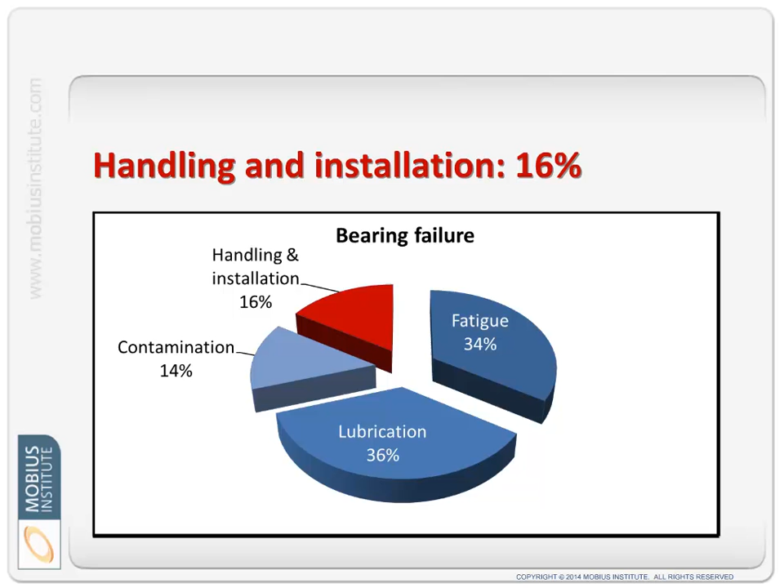So some of that was related to installation, but the failure is because of the fatigue, though handling and installation also causes problems. Now, people installing the bearings need to really understand the importance of fits and tolerances and using the proper skills to remove and install bearings, and the way the bearings are stored and transported.

All of these issues are important. Otherwise, before the shaft makes its first revolution, there's already a problem that's going to cause the bearing to fail soon. In more dramatic cases, bits of the bearing are actually broken off, perhaps, or we get Brinelling marks on the raceway.

In this case, I'm talking about false Brinelling, where this is sort of an installation process. It's also an operating process, but when we've got a stationary machine sitting next to an operating machine, those bearings are sitting there chattering away and causes damage.

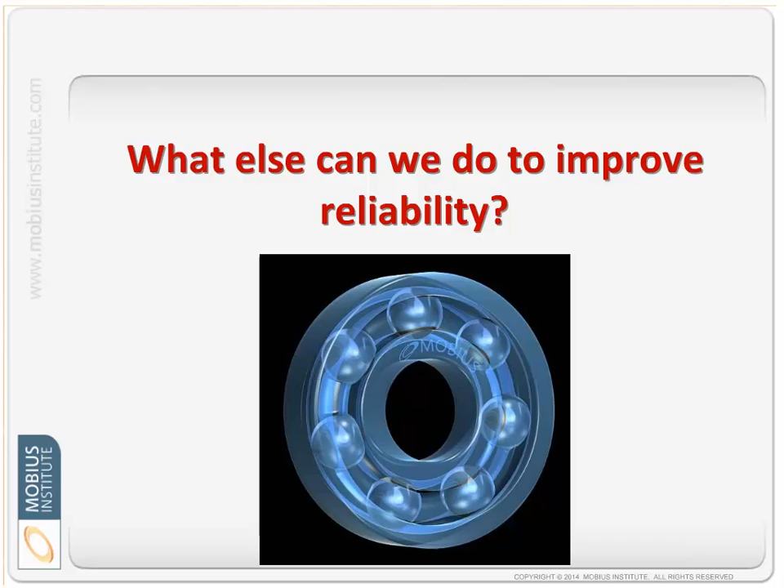But there's lots of other things we need to consider: soft foot issues, how well we're tightening and torquing bolts, everything to do with the tightening process is important. When we're creating electrical connections as well, the order of where washers go and where the conductors are put next to each other - all of those things, often people just don't know.

You may assume that all these things I'm talking about are just standard practice for the fitters and mechanics or millwrights and whatever you choose to call them. They are trying to do the right job, but if they're not given the right tools and they're never actually trained to do it properly, then mistakes are made. And very often it's just a training opportunity. You teach people how to do it properly and they think, wow, I didn't actually know that. I didn't know that it mattered if we didn't do it correctly, and I didn't know how to do it properly.

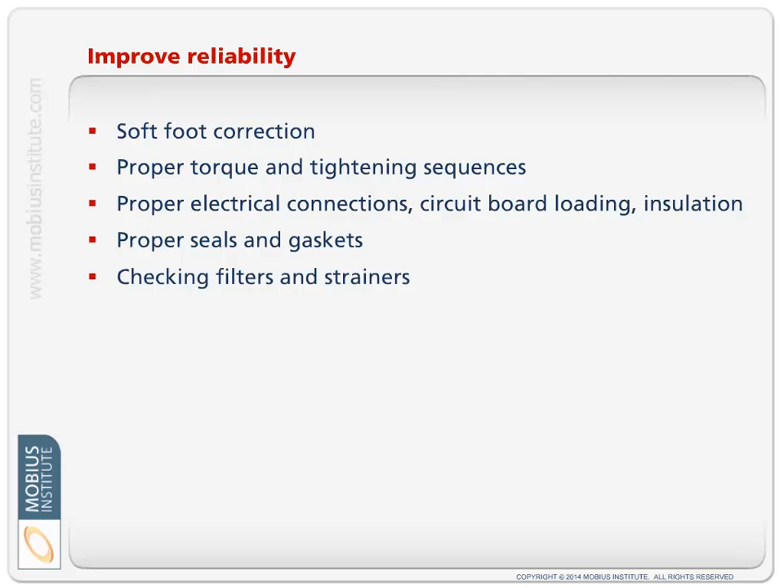So when the motor is coupled up to the pump and that job is done, the condition monitoring guys come in and do tests to make sure it's right. This shouldn't be seen as adversarial, where the guy installing the bearing feels like he's being checked up on and the vibration guy is his enemy. In plants that do it properly, they see themselves as companions working for the same goal.

When an installation is done, the first person that's called is the condition monitoring guy: come and check, make sure I've done this properly, make sure it's all good. The test is done, yep it's all good, and away it goes. Lots of vibration tests, motor tests, oil analysis, infrared tests, and so on can be performed to make sure the job was done properly.

It's a little bit like the original acceptance testing, except it's internal work instead. It doesn't have to be quite as elaborate, but still you want that equipment in tip-top condition after that work is done. Now you start the machine. You hope you don't have infant mortality problems because you've done the work properly, but to assume that's the end of the reliability issue is a mistake.

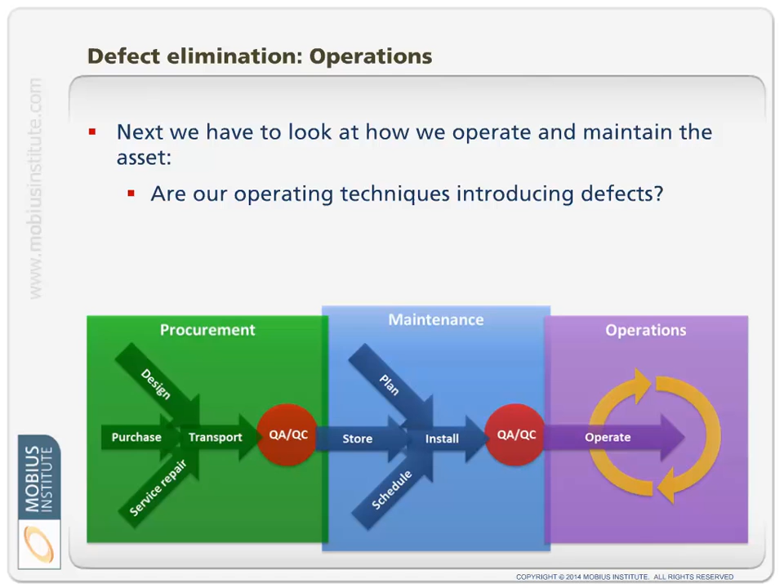These are topics we could talk about for a long time, but pumps were designed to be operated a certain way: a certain flow, a certain pressure, where valves are located, where bends in pipes are located, and so on. That's how it's supposed to be operated, so that the fluid flows through those impellers at the correct angle, and it's all good.

Get that wrong, and the pressure on the seals, the bearings, the shaft, and the impeller itself is not per design, and therefore we reduce the life. It needs to be operated at its best efficiency point. It's important, and operators need to understand that, and from a design point of view it needs to be understood, so that moving from shift to shift, the equipment is operated in the same way.

And of course, that's just pumps. We can carry that story out to a lot of other types of equipment as well.

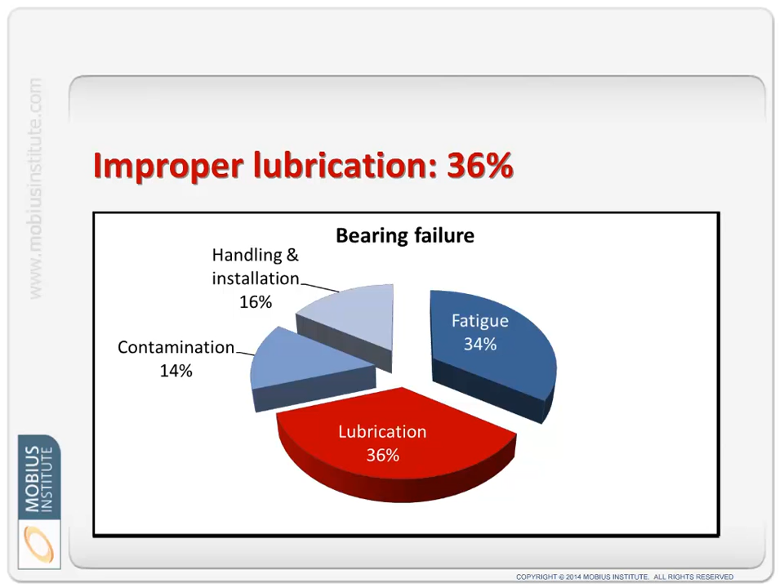Lubrication is important during the installation process, but obviously critically important as you continue to operate the machine. This is a really important topic, and I've got a few slides here to drive home how important it is. Lubrication really falls into two categories: the lubrication process itself and contamination. Here we've got 36% of failures due to lubrication versus 14% due to contamination. In many cases, the percentage of failures due to contamination may be much, much higher. But let's just look at lubrication.

Any application requires a specific type of lubricant, used without contamination, at the correct temperature, at the correct load. Therefore the lubricant has to be correct, it has to be correctly specified, and it has to be correctly applied. If that doesn't happen, we reduce reliability and we have bearing failures.

We can have one situation where there is too much lubricant, say for example greasing a bearing. You have too much lubricant, and it causes potential physical damage to the bearing itself. In fact, the grease can go into the motor, for example the motor windings. An increase in heat reduces the effectiveness of the lubricant and reduces the reliability of the bearing itself. Too little lubricant also greatly increases wear, and that's usually the problem we're concerned about.

This animation is really exaggerated about how lubrication works, but it's important to understand just what a tough job it's doing. If you consider the gap between the bearing and the raceway, either the inner race or the outer race, there is a tiny gap, between 0.1 and 1 micron. It's really important to understand just how small a space that is.

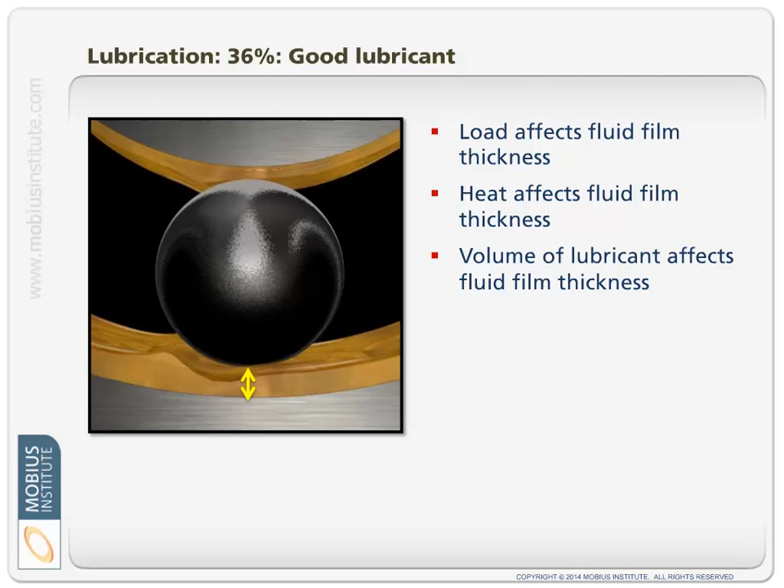It's just not on. Load affects the fluid film thickness. Heat affects the fluid film thickness, and the volume of lubricant affects the fluid film thickness. We want to maintain that gap between those two elements.

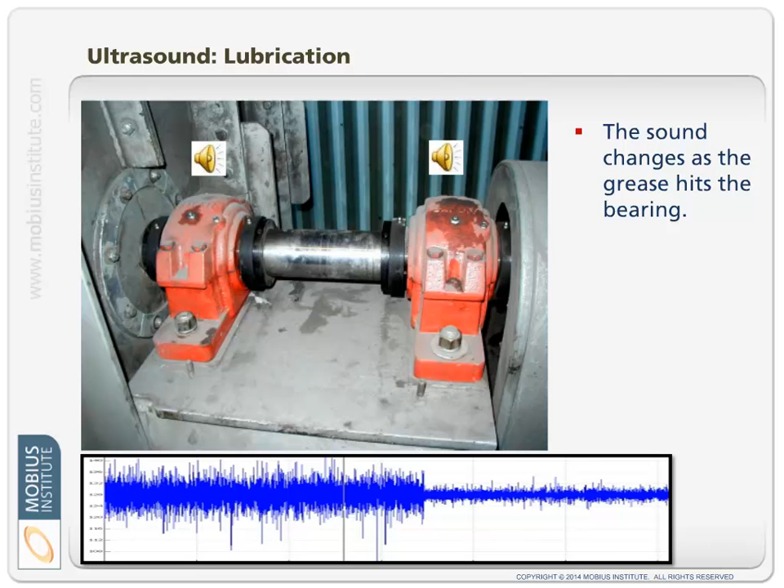So, before the grease hits the bearing, we have a certain sound, and that sound's not great. That's what it should sound like. I hope you can hear that okay. You can see the waveform down below, basically what it should sound like, how that changes. That's what an operator can listen to as they're adding grease to the bearing. It's a good technique.

So let's look at contamination. That's a really big cause. Even though we've only listed it at 14%, some studies show that up to 50% of all equipment failure is ultimately down to contamination. There are a number of possible issues related to contamination. Number one, not necessarily in this order, but the contamination can degrade the lubricant itself.

Again, it's important to understand just how small these particles are. There's a grain of sand relative to human hair. That's the smallest particle we can see. There's pollen, coal dust, and then we get down to tobacco smoke. So there's the different sizes we're talking about. Again, if you think about just how small these particles are, a pinhead, that's its size relative to all the other examples there.

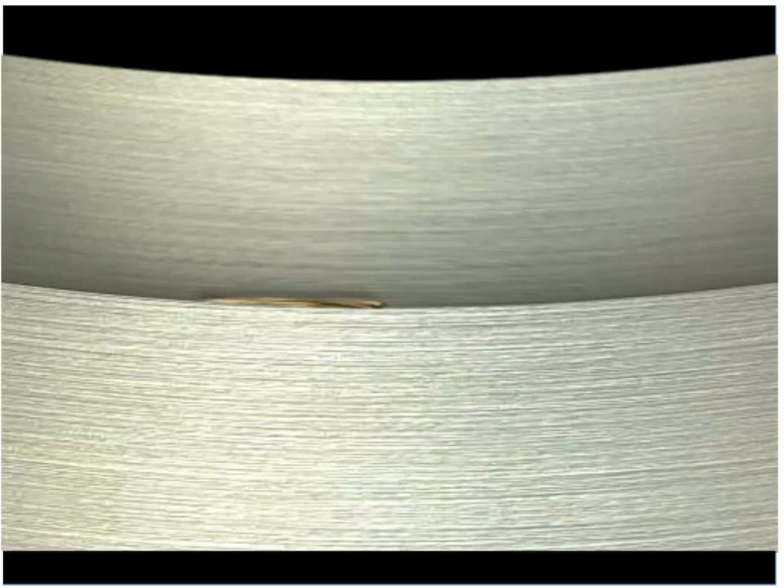Everything I'm saying here, by the way, this is bearings, but gears are exactly the same sort of situation. There may be some particles that go between the two surfaces. They may cause a little deflection, but not actually damage the surface. But ultimately, there are hard particles that are of a certain size that cause damage.

Now, remember, this is sort of 1 micron, or particles that are very small, let's just say. The gap there is 1 micron, but it takes quite a small particle to get jammed in that space. Much bigger particles, those 40 micron particles, are often just being pushed along by the bearings. They're much bigger than the gap. Same with the gears, although the operation is a little bit different in that case.

In some cases, the particles are being pushed along and they'll score or damage the surface, as I'm trying to depict in this animation. Anyway, contamination or contamination control is extremely important.

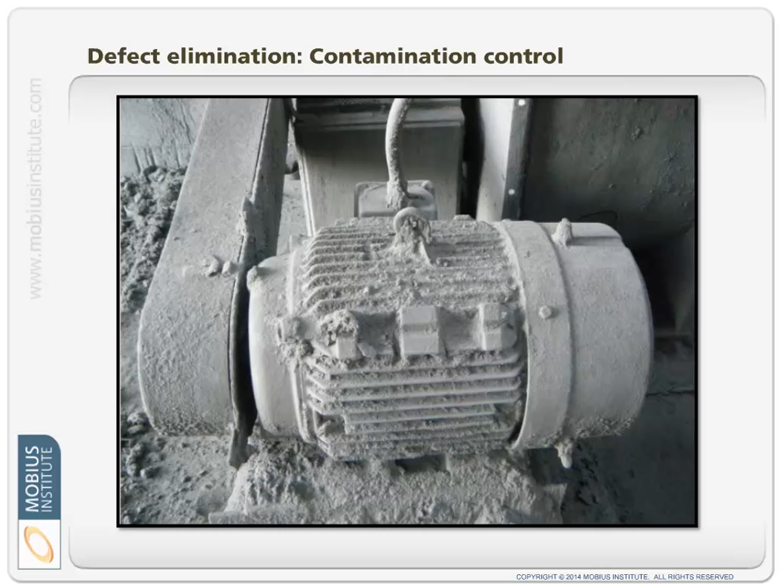And so sometimes we just have to look at the equipment and see why we're getting contamination. Imagine trying to put grease into that nipple there. How much is going to be pushed in unless it's properly cleaned. Not to speak of the overheating that's going to go on and everything else.

Some people believe that the lubricant they buy and that they store on site is good and clean and fit for their machine, and that maybe the contamination comes later. So try this experiment. Here's a filter bag. Take a sample of oil, pour it through, and that's what was found in the filter bag.

Now remember, those particles you can see, they're very large particles. There are lots and lots of really small particles as well, and potentially these larger particles will be broken up to create the smaller particles.

We haven't spoken in detail about all the different types of contaminants, but water is terrible for corrosion and terrible for the lubricant itself. When you store those drums outside, as they heat up and cool down, heat up, cool down, it just sucks the moisture out of the air, and of course if there's rain sitting on top, it sucks that in too. So you really need to take care of these things.

So, there's lots of ways through perhaps desiccants, through storage techniques, making sure the right lubricant is put in the right machine. That's a big deal.

Sometimes you look inside a bearing and you can see that it's received 4 different types of grease. Generally, those greases are not compatible and you create a problem. Sometimes completely the wrong oil is added to a gearbox. In one case, the person was using a lower grade oil just because it poured in faster.

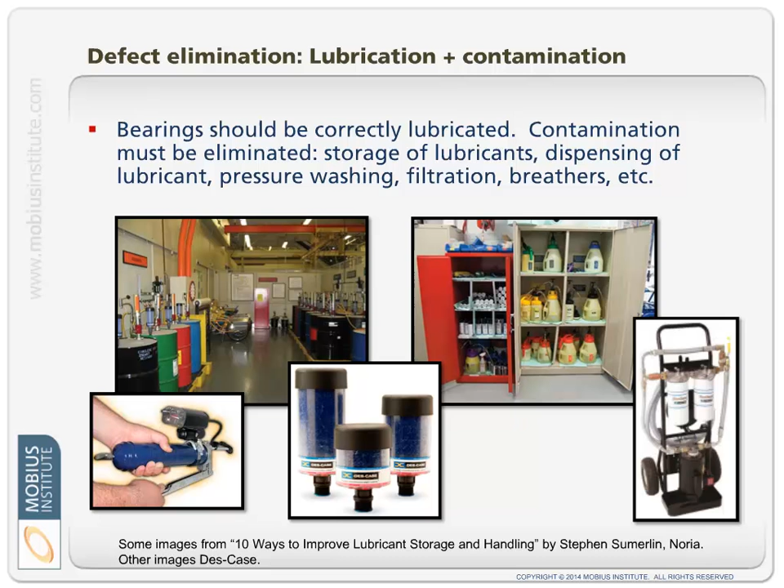Things like that. There are ways around these problems. It's not rocket science. It really isn't, and doesn't have to necessarily be all that expensive either. But the change to reliability, and therefore the breakdowns, and therefore the costs and everything else, it's a substantial issue.

So just one little point, on the filtration. It's important to understand how these filters work and what beta factors mean, because even though you can say, well, I've got a 10 micron filter, you need to consider the effectiveness of the filter. How many particles are actually getting through that. Okay, there's a certain size, but how many?

Anyway, we won't dwell on this for too long, but it's really important to understand these sorts of things so you know really what you're getting into. Okay, so when we talk about oil analysis, it's just worth dwelling on this just one more little point.

Number one, the oil analysis is there to check the chemistry of the lubricant, to make sure that the viscosity is okay and that the additive packs are okay, to look at oxidation and to look at the small particles. But number one, it's there to look at the chemistry.

So this is condition monitoring, but we can perform, if you like, condition-based lubricant change. If we allow substandard lubricant to remain inside the machine, it leads to degradation in its reliability. It will lead to faults.

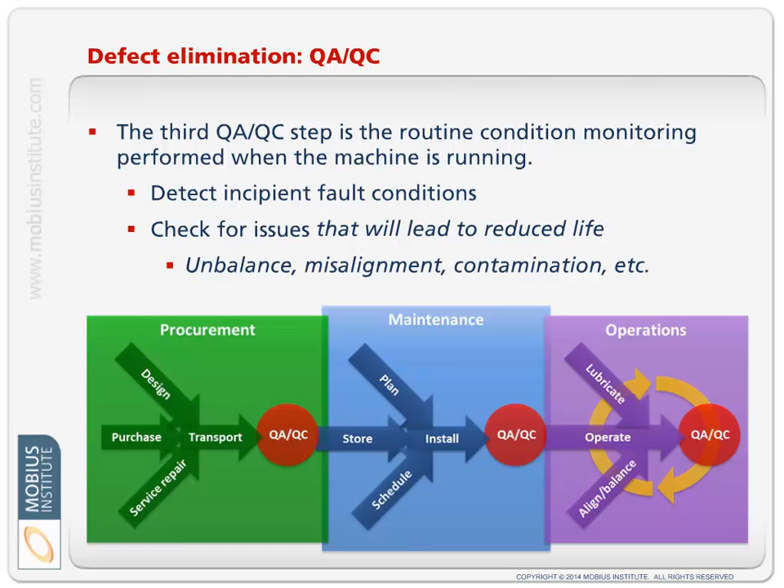We can go around and take measurements and look for faults, the normal sort of routine that we go through. However, with reliability in mind, we should be looking at things like looseness, misalignment, and unbalance. Think about not just whether the alignment is so bad that we need to correct it now, or whether the balance is so bad that we need to correct it now. We need to think, is it bad enough that it's going to degrade the reliability of the equipment and lead to faults later on?

So let's say we perform a test and we see that there is some misalignment or a little bit of unbalance. We might consider that, from a fault condition point of view, it's okay. But if you make that call, you just have to now wait until that bearing fails.

You can expect that the bearing will fail prematurely because every single rotation is being pounded because of the misalignment or the looseness that's going on, or the resonance which is something that should have been corrected earlier in the case of the resonance.

Unbalance can develop over time, and so therefore as part of your condition monitoring program, we need to eliminate that unbalance.

Everything has a priority, everything has a cost. In my opinion right now, these sorts of things don't get much priority. In fact, they're not even looked at. The condition monitoring person won't say anything about unbalance until it gets quite bad. That's something that I think needs to change.

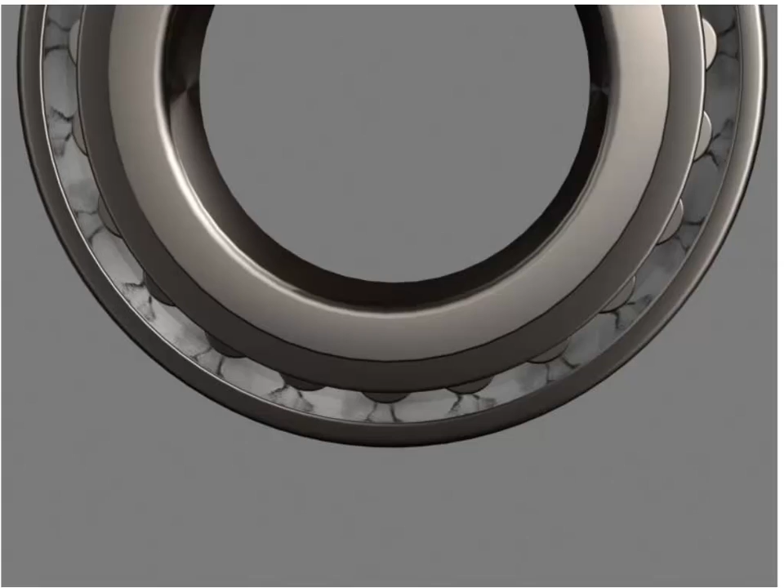Now, you can look at the surface of the bearing and you'd be amazed what you might see. In this case, water has pooled up around the rollers while the machine was stationary, but you can see all kinds of patterns which indicate misalignment, false Brinelling, EDM where there's current going through the bearings, lots of things. It tells a story.

Okay, now, we've been talking a long time. I hope this is proving useful for you, but there's a few more things to say. It's okay to talk about all these opportunities you have to make some improvements, achieve better reliability, which reduces the costs. How do you implement this sort of a program in your organization?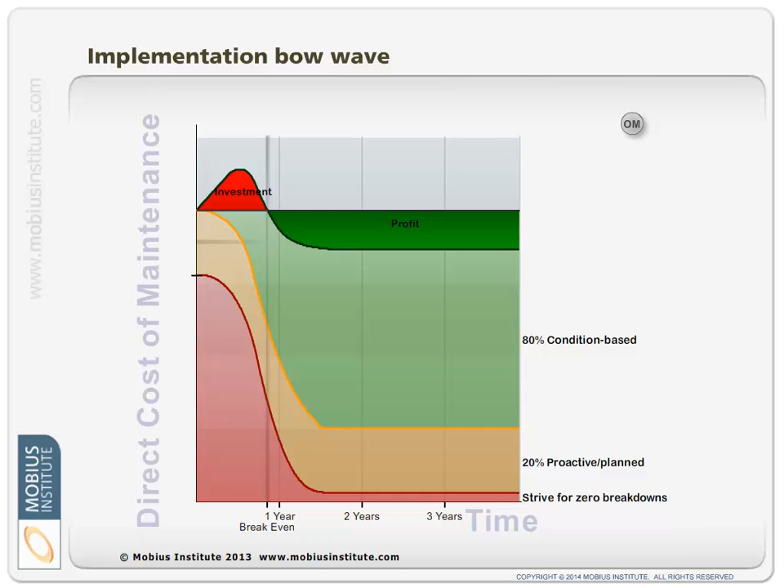So you can just make these smaller incremental steps, invest a little bit, in some cases not at all, it's just really a change of practice or something like that. But you can make these small investments, get a reward, small investment, get a reward, and senior management can see the value in this kind of philosophy. So this is important. But the question is, how do you go about it? What's the overriding principle here?

Number one, you can go to senior management and say, I've seen the light. There is a way we can make some really dramatic changes in our plant. We can achieve the lower costs and higher levels of revenue and so on that I described at the beginning. And you can get that corporate support. In my experience, the plants that have the greatest success do go down this path. They get that senior level of support. And when everyone from the plant floor up recognizes that senior management believe this is important and they're supporting it, that's when change will happen.

There's an excellent business case to make. As I just described, you don't have to make really large investments, so it should be possible. Sometimes, however, people are concerned about that approach because maybe it puts too much focus on what they're doing and there's too high expectations. So another way to do it is what I call reliability by stealth. It's flying under the radar a little bit, just taking small projects and, as we say, getting some runs on the board. Have some successes, report those successes.

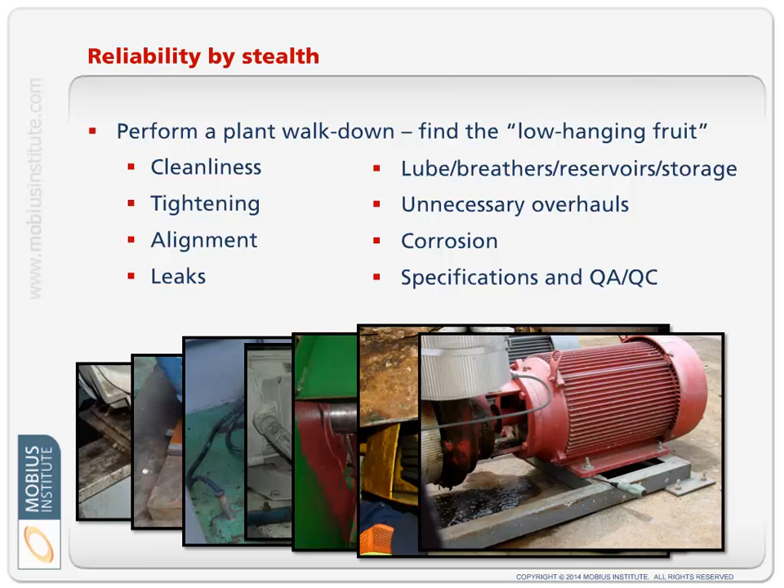Do you have standards or specifications when it comes to balancing and alignment and all those sorts of things? You can do a plant walk-down and find all these opportunities, then prioritize them. You can determine which ones will give you the biggest bang for the buck and go after those.

So personally, as I mentioned, I think it is worth getting that corporate approval, getting that support from the top. I think it's important to perform some benchmarking, so you identify your starting point, set some targets, and therefore you identify your gaps. And establish some KPIs, set some goals, and communicate your successes. So as those KPIs go in the right direction, you record those and report those.

Now, so far, everything we've discussed has been technical in nature, installing bearings properly and doing all the rest of it. There's been one big gap in what I've described so far. What have we forgotten so far? It's the people. It's the issues with the people. It's the reliability culture of the plant. And that's what you have to change.

Yes, you can take on these little technical issues, but for example, people go out and buy laser alignment equipment, but it's not used. Vibration equipment's purchased, it's not used properly. Containers are purchased for proper lubricant dispensing, but they're not used properly, they're dirty, etc. Why does it always feel like it might be you against a whole lot of people in the plant? Why don't they seem to get it? Why do they resist the change? Why is it so hard when you know that it makes good financial sense?

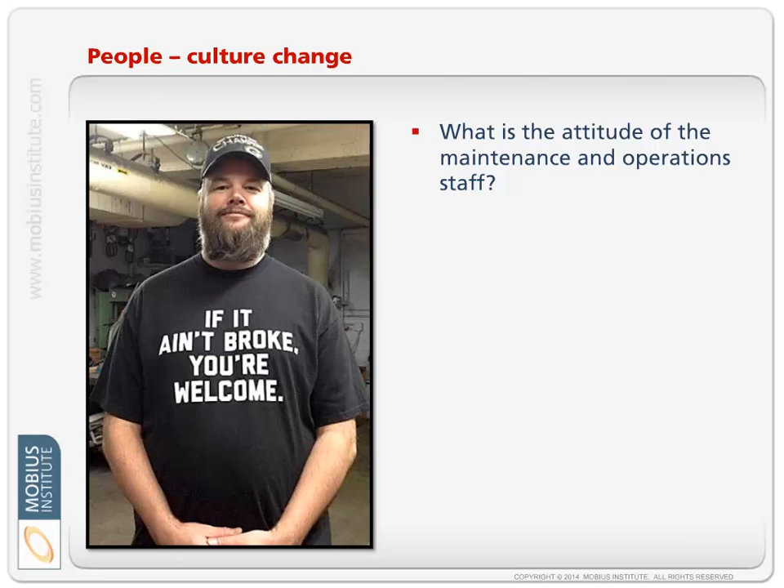We need to be able to talk about these topics without feeling like people just don't want to hear what we're talking about. So just think about a few things. And when I talk about culture change, obviously this isn't religious or anything else. It's just the reliability culture. It's just the way things are done in the plant. What is the attitude in the plant? Are they being rewarded right now for the unreliability? Is reliability important to them? Now, when I say rewarded for unreliability, that's the overtime on Sunday.

That's the huge pat on the back and the congratulations when the maintenance guy gets a machine up and running. It's not to say that a person doesn't deserve that congratulations, but if that failure was premature, if that failure was due to poor operating practices or maintenance practices, you need to consider that those repairs and that emergency work is really something that no one should be proud of.

But the flip side of all of this, it's one thing to say, well, we need to treat that person in terms of not rewarding them for unreliability, but you know what? We also have to go to that person and say, hey, you're the one that spends all the time with the machine. Can you give us suggestions? But when they give us a suggestion, we have to listen to it. We have to act.

Now, this doesn't mean we accept every suggestion and make the requested change. But if we don't, we better go back to that person and say, look, thanks for the suggestion. This is the reason why at this time we can't do it. Be it technical, be it financial, be it whatever. But ask them their opinion and make sure they're given the correct tools, time and training to do the jobs properly. It's no good blaming people for reliability issues and then you find out, well, they haven't even been given the proper training to install bearings properly and so on.

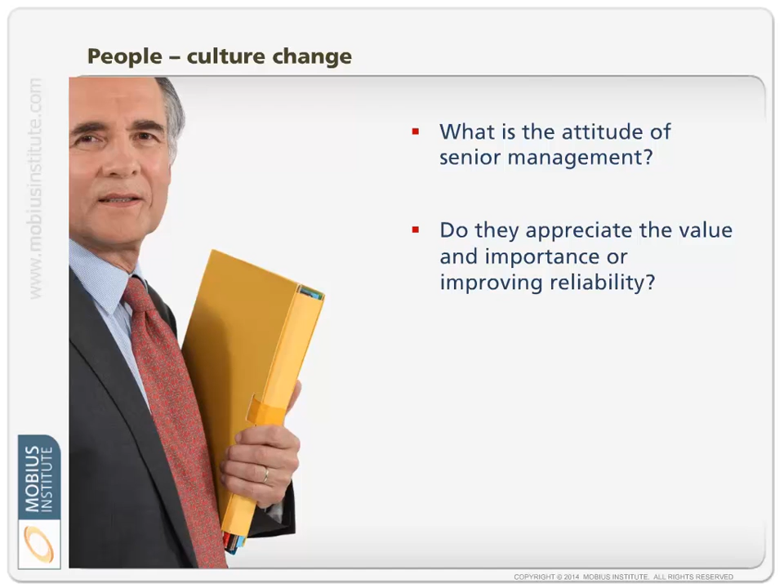So, we need to make sure that senior management appreciate the value and importance of improving reliability. And it's not a hard sell. There's so many compelling arguments, as I went through right at the beginning of the presentation. They have to make reliability a priority, ideally with some sort of statement. Just as there might be a statement regarding safety, how safety is our top priority and so on, reliability needs to be right there alongside it, because they're related apart from anything else.

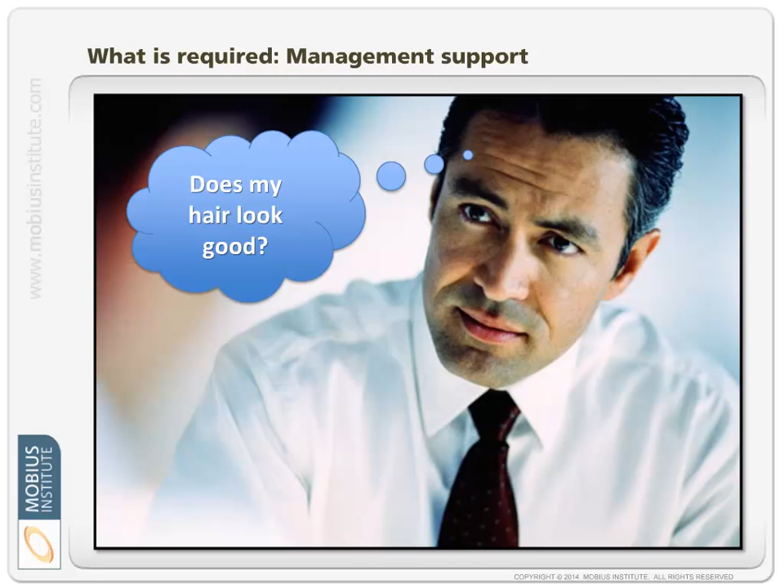And that might mean that they have to provide the funding. Well, it is going to mean, you can't add filtration and special lubricant storage devices and buy vibration analyzers without some sort of funding. But anyway, you need that top level of management support, so that if they are saying reliability is critical to the success of the organization and everyone must be properly trained and equipped to do the job properly, then you'll see some changes. That's the message they need to hear. If you don't deal with the culture change, then all the technology and all the training will be for nothing. It just won't make the difference. So, having said all of that, let's have a look at some of the reasons why programs do fail.

Now, some of these things I mentioned earlier, so I won't dwell on them, and you can, of course, pause the movie if you like.

I think that part of the problem is that people start with a really heavy analytical approach. They spend a lot of time and money trying to analyze the reliability rather than actually trying to improve it. And then they're using that information to make decisions where the reliability data is not reliable. So that's an important one.

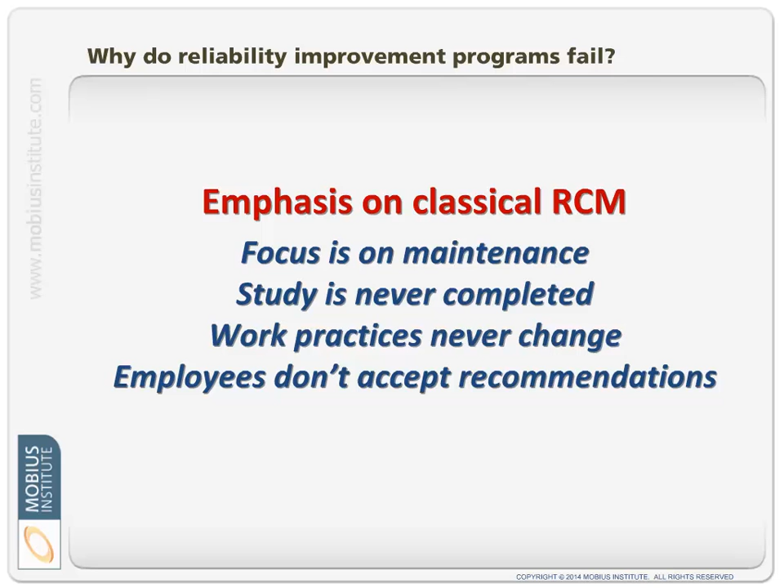I also see companies that just dive straight into classical RCM, and the focus on RCM, number one, is maintenance. It's about developing maintenance tasks which will properly maintain the equipment and keep it running. But often the study is never completed, work practices don't change, and employees don't accept the recommendations. A lot of programs, after studying this equipment and the next piece of equipment and the next, it's just really hard work.

The sad fact is, this is just one pretty good study that was performed: only 15% of projects succeed. The definition of succeed you could look at, but even in the ones that did succeed, often there wasn't really reliability improvement associated with it. So I'm not saying don't do it, however you need to be forewarned. I think there is an efficient way that you can make key decisions so that you can start making improvements today, and then maybe only on the 10 or 20% of most highly critical equipment, and equipment that proves to still have poor reliability, do you get more formal with your RCM and FMEA and so on.

I mentioned that senior management support is really important, but if you don't get it, that's a common reason why programs fail. Getting past those first couple of issues, in a lot of surveys we've done, when we've asked, okay, what's holding you back, it's senior management support.

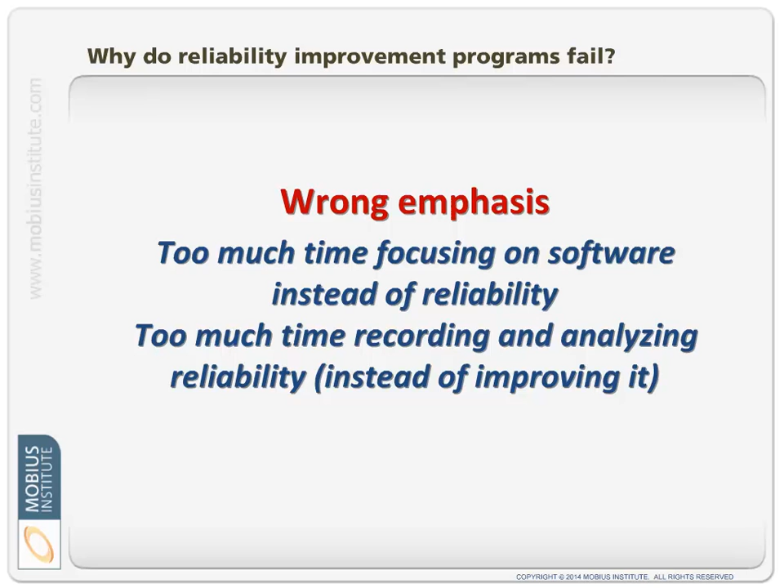This issue of the wrong emphasis being placed on reliability data can cause a program to fail. There can be reliance on interval-based maintenance. Sometimes companies with reactive maintenance think the most logical thing to do is move to planned maintenance. Planned maintenance is important, but treating everything as if it's age-related failure, and therefore repairing quote-unquote healthy equipment, performing intrusive inspections that cause harm to the machine, performing unnecessary tasks, etc. It is all costly. It's not all counterproductive, but a certain chunk of it is.

Then we get down to the point of this actual presentation: that the primary focus is on condition monitoring. Now, it is important to detect faults for sure, but there needs to be an understanding that it's intended for condition-based maintenance, not just reactive maintenance with an earlier warning. We have to use condition monitoring technologies to improve reliability, and we also have to write reports that are easier to understand, that people can take action on, and so on.

Now, this one is a sensitive issue, and if you're a consultant, I'm probably about to offend you, and I apologize for that. There are consultants who do a great job for organizations because perhaps the program is driven by the client, but the consultant comes in just to help them. So the client says, okay, we recognize we have a contamination issue, maybe I'll get you in, consultant, to do a bit of an audit and make some recommendations.

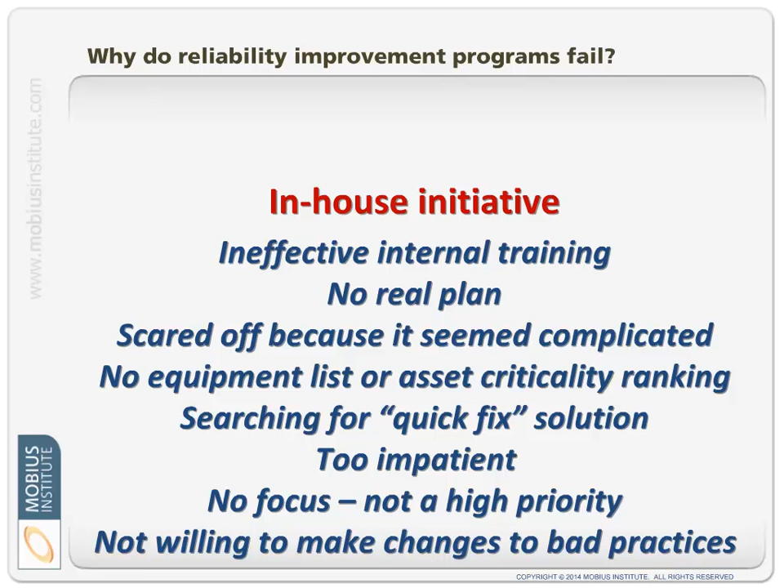You have to take people on. There's a way to do it so that they feel part of the process, and that they actually even suggest that they need to change. But these things need to happen.

And of course, some programs fail because you never really did get management buy-in, and they then kill the program, or you get a new manager who comes in, a new CEO or whatever, who doesn't appreciate the value of reliability improvement, wants to make a name for him or herself, thinks they can save a bunch of money, and they kill the program. And for the next little while, the books look better because maybe a bunch of people have been let go, people aren't going on training, etc.

For a little while, it's a great financial strategy, until all those reliability problems raise their ugly heads again, and they are ugly, and they will raise their heads, and the problems start up.

So it needs to be part of the culture, just as a manager wouldn't come in and say, right, forget all these stupid safety practices, it's just slowing us down. They shouldn't also be allowed to get rid of the reliability practices.

Okay, I will say right now, I am biased in this regard. I run a training company. I believe in education.

I believe that lack of education is the root cause of all of these problems. If people understood the ramifications of the way they're operating the machines, the way they're purchasing equipment, the way they're designing, the way they're maintaining, the way they're doing everything, if you understood how those practices are causing the problem and the benefits that can be achieved by making changes, then the changes will occur, and that is only going to happen through education.

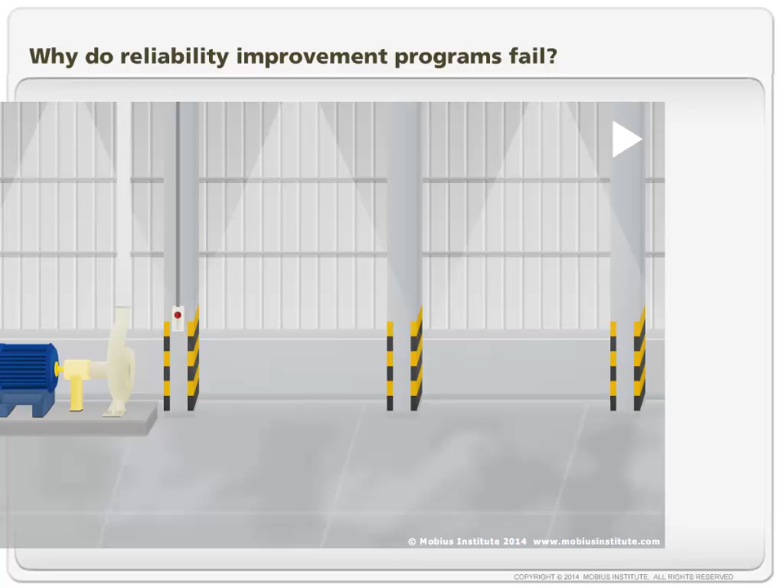Now I'm going to make one little final dig: this Trojan horse training. It's just a personal comment, but there are a lot of companies that come in and say that they are a training company and that they are there to train you. But I like to joke that sometimes those consulting companies that offer training are sort of like Trojan horses. They come in to say, we are here to teach you, but their ultimate goal is not to educate you so that you can do it properly. It's to create a consulting opportunity.

So they come in and tell you some of what you need to know, but potentially make it all sound so complicated that it's out of your reach to do it, and lo and behold, they have services and they can do it for you. I've seen it so many times, and yes, I'm biased because we offer e-learning and all that sort of stuff. But you've got to be careful, because those people who come in as trainers, you need to make sure they're not also coming in as consulting salespeople who ultimately just want to do it themselves. Okay, how many people have I just offended?

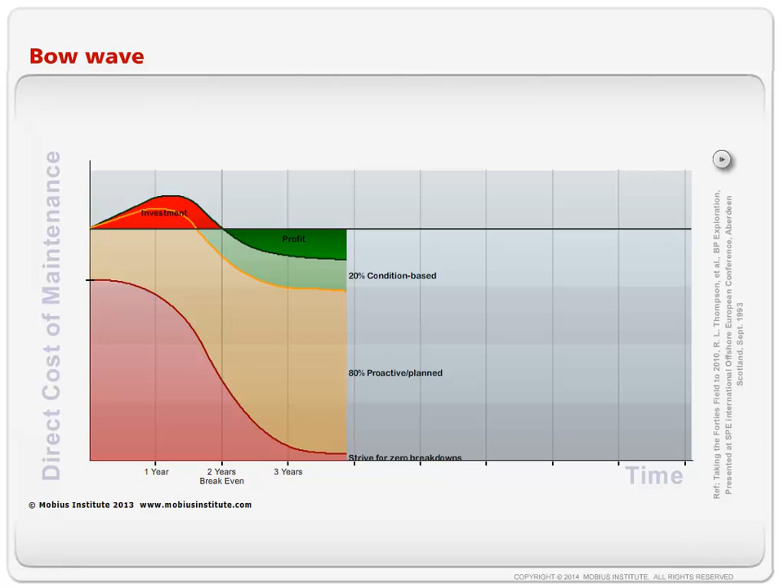So last but not least, the key implementation issue. I talked about the bow wave before, and that's important—there's a lot we could talk about breaking it up into lots of smaller bow waves and so on. But we can get to a point where, if we work hard at this and do all the things I've discussed, I believe you can achieve these goals. And then you will keep operating in this new way. You can keep making new improvements, but you just need to be diligent and say, this is the new way of working—keep doing acceptance testing, keep doing proper lubrication, keep doing all these things.

But beware the manager who comes in to save money, because if they think they can save money by firing the reliability people, stopping the condition monitoring, and buying less expensive motors and pumps and all the rest of it, you will be back to that unreliable state faster than the time it took to improve reliability. And that situation has happened again and again and again in the history of lots of plants.

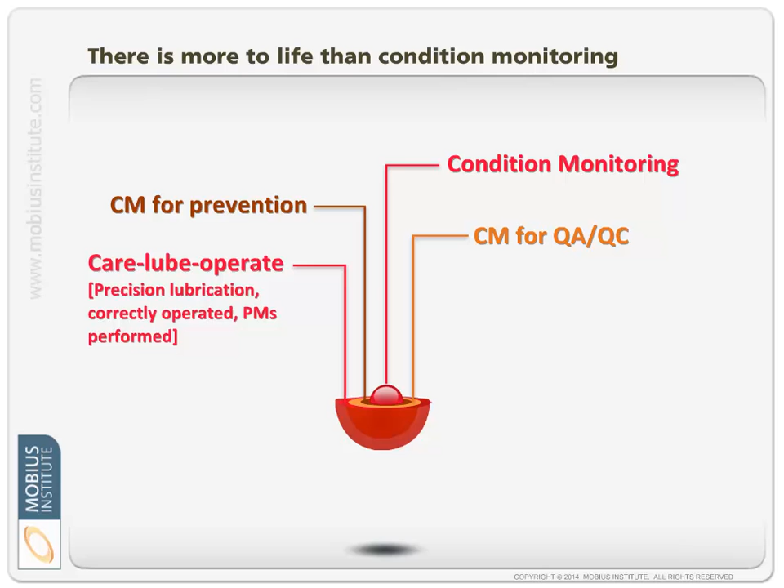So just be warned. Condition monitoring is great, detecting faults is great, but we need to look at ways we can use condition monitoring for prevention—detecting conditions that will lead to faults and eliminating them, using condition monitoring for acceptance testing and testing after maintenance has been done. Look at care, proper lubrication, proper operation, performing precision maintenance—the way we install equipment and bearings, balancing, alignment, tightness. Look at the way inventory management is handled, planning and scheduling, transportation and storage, and the design and procurement process. So yep, condition monitoring is important and incredibly valuable, but really I believe you need to look at this bigger picture in order to improve reliability in the plant.